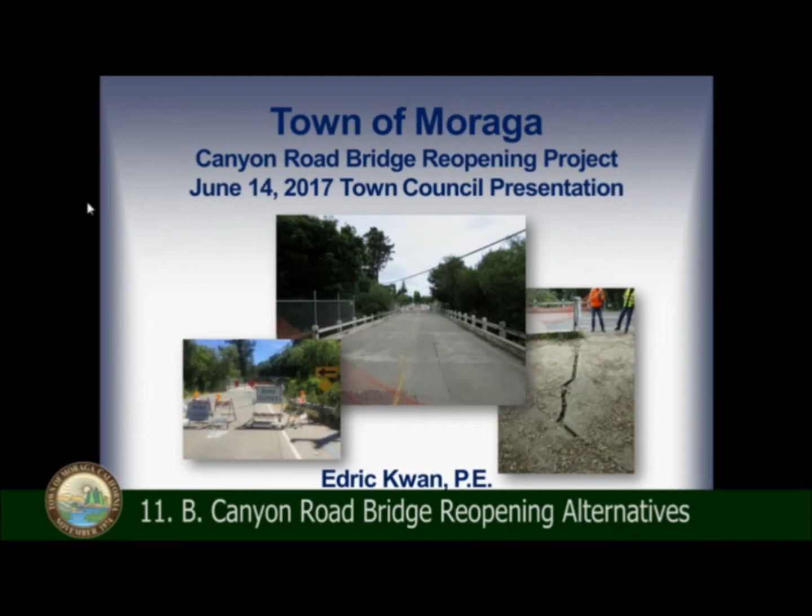We've assembled a team of experts to address reopening Canyon Road Bridge in the most expeditious manner as directed by you at the April 27th Town Council meeting. I want to first begin by stating that the health and safety of Moragans and members of the public who utilize our streets, roads, and public facilities is of the utmost priority to the town. The town has been diligently pursuing all available repair and funding options for this project, which is not only a health and safety concern, but inconvenient for town residents and businesses. Due to the nature and magnitude of this issue, coupled with the town's limited resources, the town is reliant on several federal funding sources and processes in order to address this project.

This is not my first time, but my third local emergency affecting a major local roadway. The first two emergencies involved securing substantial federal emergency funds, and I intend on continuing my efforts pursuing outside funding through its complex process for this emergency.

Our presentation will walk you through in detail the complexity of this situation by providing background and work completed to date, alternatives for reopening the bridge, staff's recommendation based on outside funding eligibility, timeliness, and risk, and next steps necessary to move forward with reopening the bridge. Please hold your questions until the end of the presentation, since we may be answering those questions as the presentation progresses along.

In this presentation, I'll begin by providing background to the Canyon Road Bridge. Kevin Tillis, President and Senior Principal Engineer for Hultgren Tillis Engineers with more than 34 years of experience, will then discuss the landslide and existing bridge conditions. Next, Lance Shree, Senior Project Manager for Quincy Engineering with more than 28 years of bridge design experience, inclusive of 13 years with Caltrans, has designed over 100 bridges in his career, and he will outline the various alternatives to consider. Our very own Shawn Knapp, Senior Civil Engineer for the town with over 17 years of experience in municipal engineering and quite well versed in the federal funding processes, will next provide details on the upcoming milestones in order to execute staff's recommendation to reopen the bridge.

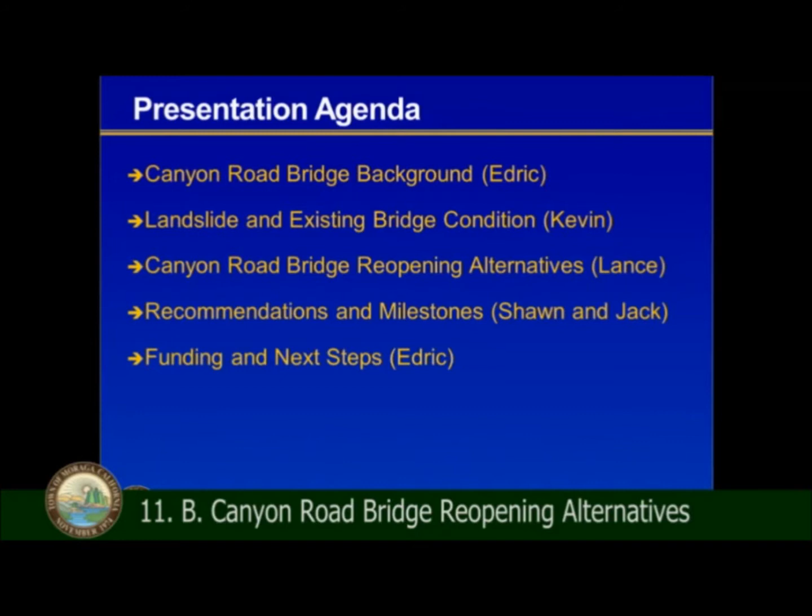Jack Walker, the Director of Transportation for NV5 - the same firm already contracted with the town to design the permanent repair and replacement of the bridge - will also join in and discuss the environmental, utility relocation, and right-of-way aspects. I will end with the funding requests and next steps.

Here you see a vicinity map and affected communities. The Canyon Road Bridge is located near the southern border of the town along Canyon Road. The two-lane bridge crosses over the west branch of the San Leandro Creek, also known as Moraga Creek. The concrete deck bridge was built in 1936, is more than 80 years old. The bridge deck is supported by a metal beam girder substructure on top of 4 rows of metal H-piling piers.

In the creek and along the creek banks, the existing bridge is relatively narrow and does not have typical modern-day safety features like pedestrian sidewalk or bicycle lanes. Canyon Road ends at a Y intersection with the south and north segments of Pinehurst Road, which leads to Castro Valley and the Oakland Hills, respectively. The community of Canyon, comprised of approximately 200 people and a small K through 8th grade school serving 69 students, is located along northern Pinehurst Road within unincorporated Contra Costa County.

The bridge was used by emergency responders, regional commuters, people accessing recreational parks and trails, local school children, and Moraga and Canyon residents. Based on the latest Caltrans bridge inspection report, the average daily traffic count is 6,000 vehicles, along with significant numbers of bicyclists and pedestrians.

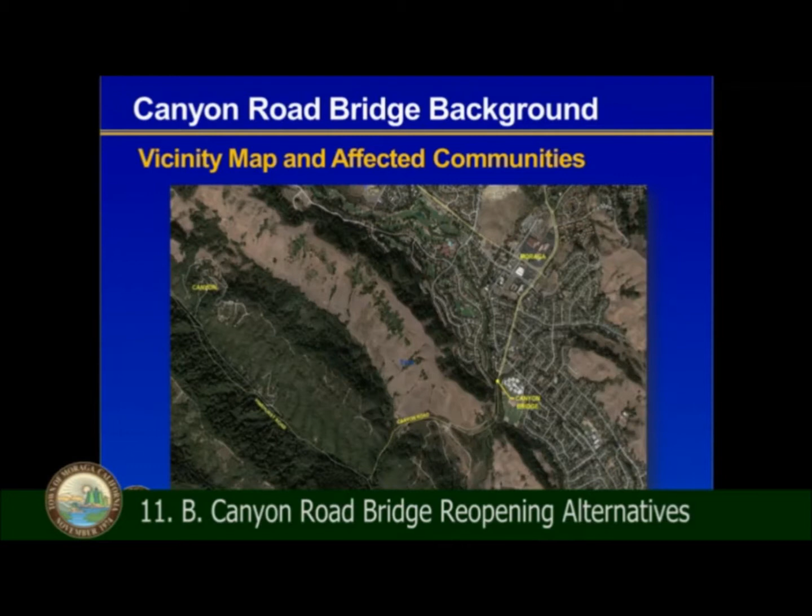Zooming into the nearby Canyon Road Bridge itself, you can see quite a few features here. You can see Moraga, AKA the San Leandro Creek, and Larch Creek that flows to the upper San Leandro Reservoir. You can see the Lafayette-Moraga Regional Trail that sits on East Bay MUD lands and possesses an easement by East Bay Regional Parks District. The trailhead itself connects directly to Canyon Road. It also serves as a fire trail, and it's also used quite frequently by students who walk to Joaquin Moraga Intermediate School.

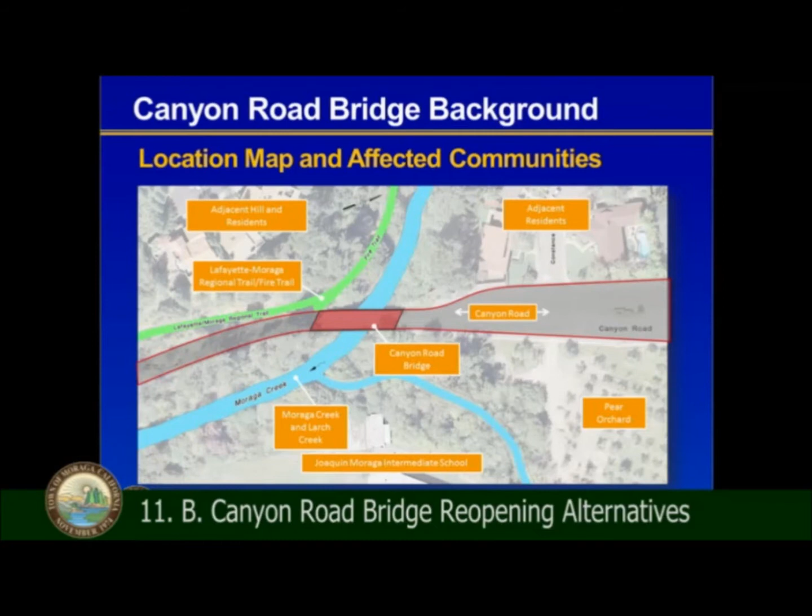Alignment of this existing road is very constrained by the creek alignment and hillsides, and adjacent residents you can see on the west side. Aside from having JM Intermediate School on the east side of the project, buffered by the pear orchard, it's also on school district land, and it's harvested annually at the end of September.

So I want to talk a little bit about what we've been planning for years. Back in 2014, the town secured a Highway Bridge Program grant and a Contra Costa Transportation Authority grant to replace Canyon Road Bridge. The bridge qualified for the HBP grant program because its sufficiency rating scored 48.8 on a scale of 1 to 100, and was considered structurally deficient and functionally obsolete, according to the 2013 Caltrans Bridge Inspection Report.

The project followed the typical lengthy federal funding process for its approvals, and the planned replacement of the Canyon Road Bridge was anticipated, prior to the recent bridge closure, to occur next year, mid-2018. However, in consideration of the current bridge closure situation and the unfortunate complexity of outside agency processes and timing issues, staff does anticipate delaying construction of the permanent bridge replacement until mid-2019.

Prior to the landslide, the Caltrans portion of the environmental process was nearly complete. The next phases for the permanent bridge replacement are right-of-way clearance, meaning obtaining all the right-of-way, easements, and relocating utilities; the engineering design, which involves preparing the plans, specifications, and estimates; and then finally construction.

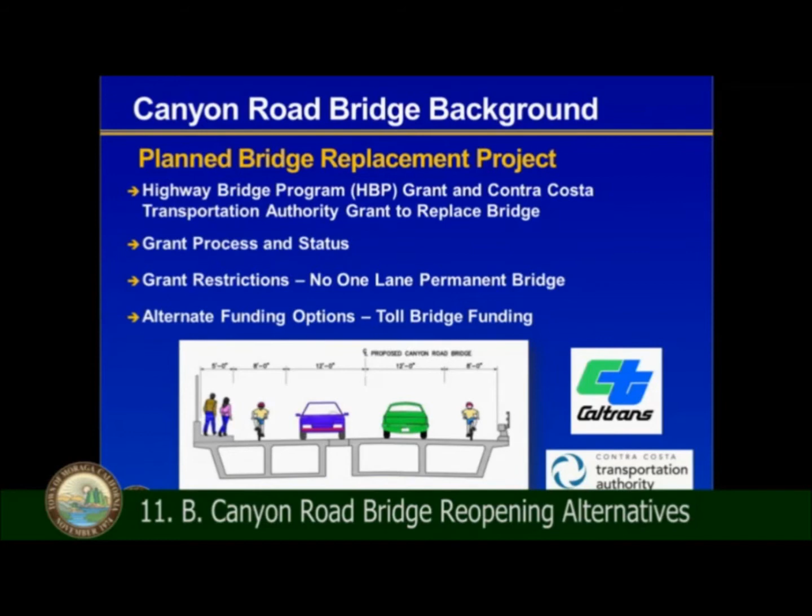The alternative approach to using secured HBP funds for the permanent bridge replacement of Canyon Road Bridge would be to enter into an agreement to privatize, meaning selling the existing bridge and right-of-way. Under this scenario, bridge tolls will be collected from local users to pay for bridge replacement and provide investor profits. Staff does not recommend changing the currently approved, fully funded federal project to a privately financed toll bridge project, which would be a significant change. If the town wants to consider this option, our attorneys would need to explore the legal and environmental ramifications. And not only that, this option does not accomplish getting the bridge reopened quickly.

At this point, I'm going to pass it on to our next section on landslide and existing bridge condition. Thank you, Kevin. See if I can master the clicker.

Good evening, I'm Kevin Tillis. I'm with Hultgren-Tillis Engineers. My portion of the presentation tonight, I'm going to start with a timeline of events.

You saw some of this before, and then I'm going to follow up with some pictures and show the site conditions. And then I'm going to show a little bit about the landslide, the depth of the landslide, the movement of the landslide. Basically kind of a factual summary of what's going on out there. So let's start out with the timeline of events.

On Monday, April 17th, your town was notified that there was some damage at the bridge location. They did a couple things. First, they contacted Caltrans to see if they would come out and do an inspection. Caltrans said no, we're not going to come out on an emergency basis, you need to do it on your own. Then they contacted consultants, which is myself and our firm.

On Monday they contacted us, and on Tuesday we came out to the site and took a look at the bridge. They also contacted engineers from NV5. Jack Walker's here with NV5, he's going to be talking later, but he wasn't the one that showed up to take a look at the bridge. There was tension cracks, an indication of mass landslide movement. We'll show the pictures here in a minute.

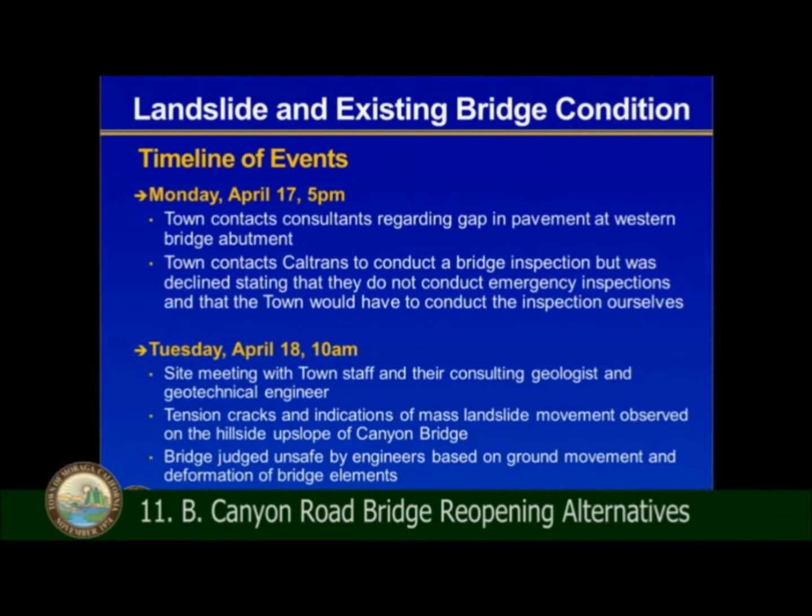Okay, the next day we started drilling borings. We put in 2 inclinometers on the next day, and later we put in 2 more inclinometers. And then we started to monitor the slides.

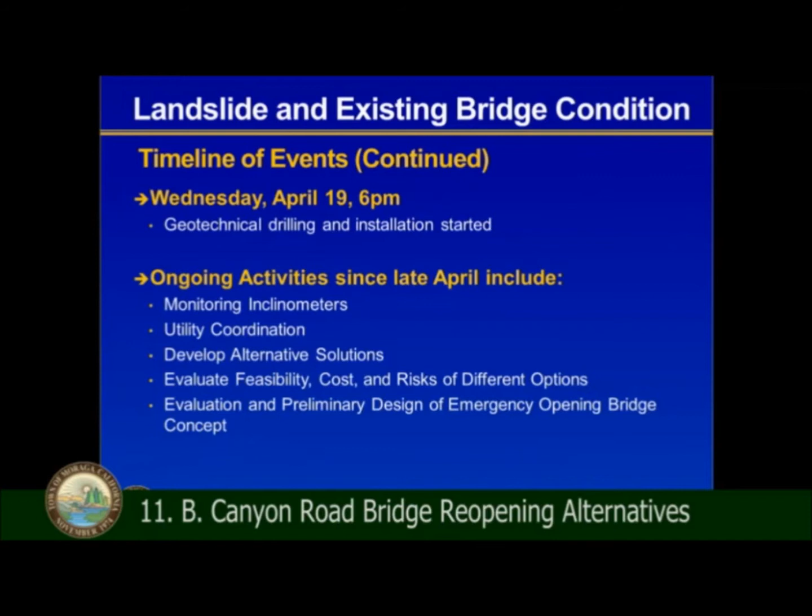And so since late April, things that have been done by the consultant team and your staff: we're monitoring the inclinometers. There's been coordination with the utilities that are going to be impacted, which will be discussed later. They've been developing alternative solutions; feasibilities have been evaluated, costs and risks of different options. And last, evaluations and preliminary design of emergency opening and bridge concept. All that will be covered in this presentation, but not by me.

So I want to do a little setting here, and I'm thinking my laser's probably not going to work, but I'm going to see if I can get the laser to work. No. Is that going to work? Yeah, it works better. You really can't see it, so I'll just talk to it.

Oh, there we go. Laser works on this, it doesn't work on that. I'm helping you. Right. He's doing the work for me, which is good.

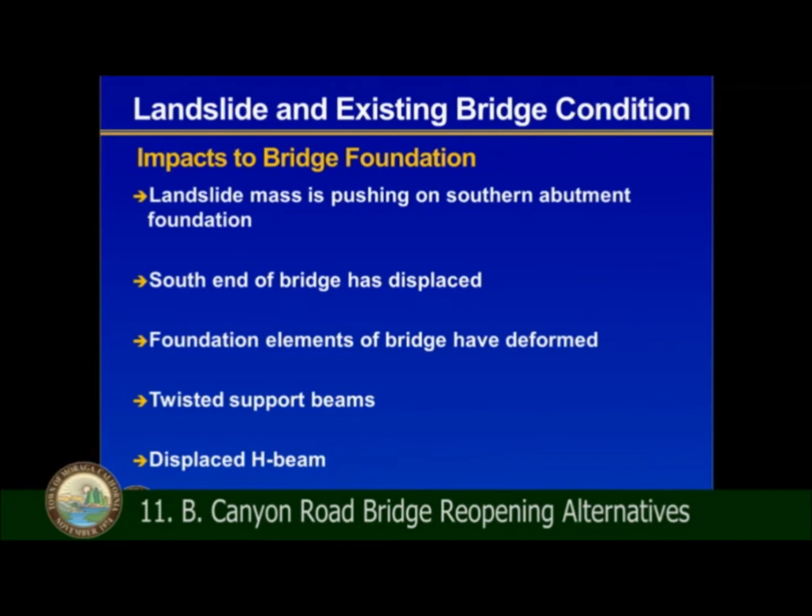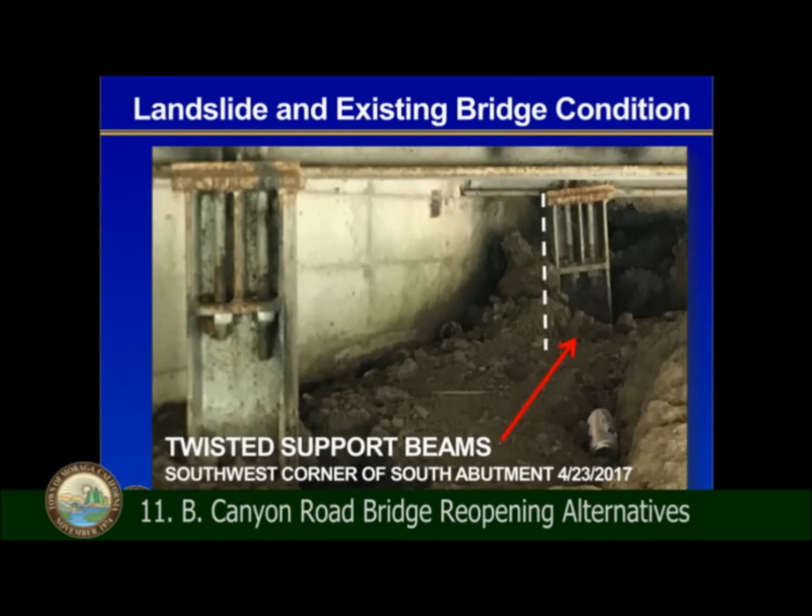The little white dashed line there, that would be vertical. And so you can see that that pile was vertical. NV5 has a picture of it in the past. That's how much it moved since the landslide, and it's also twisted the foundation. This is just a close-up picture of the same thing. I got a series of pictures here that are going to show the first bent. This is from the side of the bridge. This shows that the foundation's been racked, which basically means it's twisted. It's kind of turned.

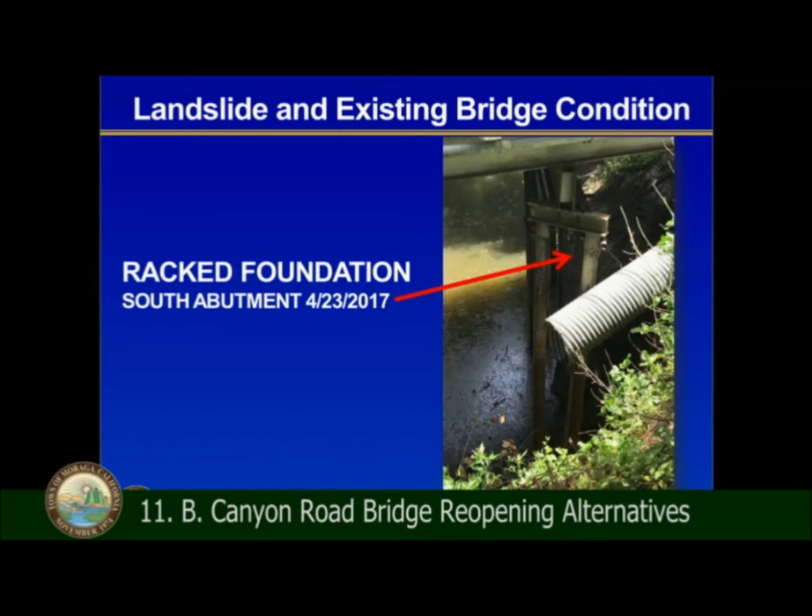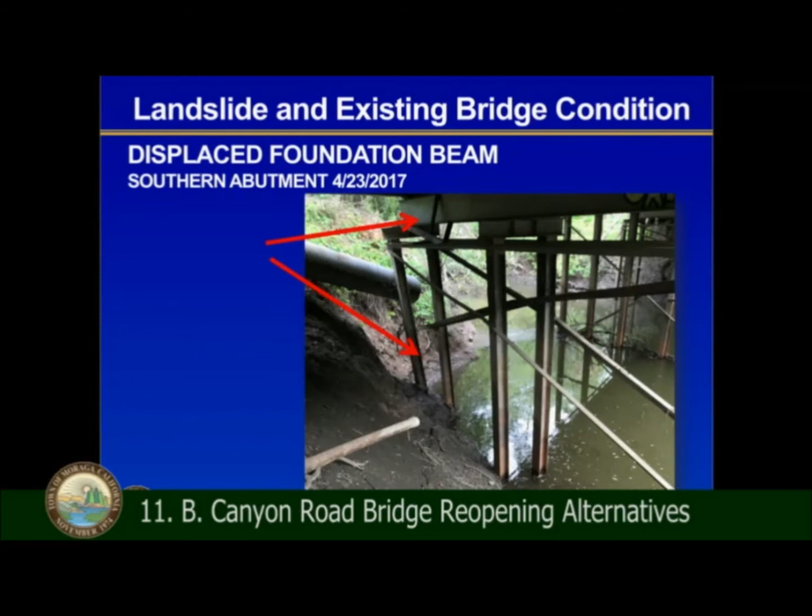Here's a similar picture. You can see from the arrows, it's pretty evident that the piling is moved laterally. It's not vertical. One of the things you want to notice is that the water's still up high. It was much higher than this during the winter. It had come down, and it's much lower now. Again, just a similar picture showing the bridge.

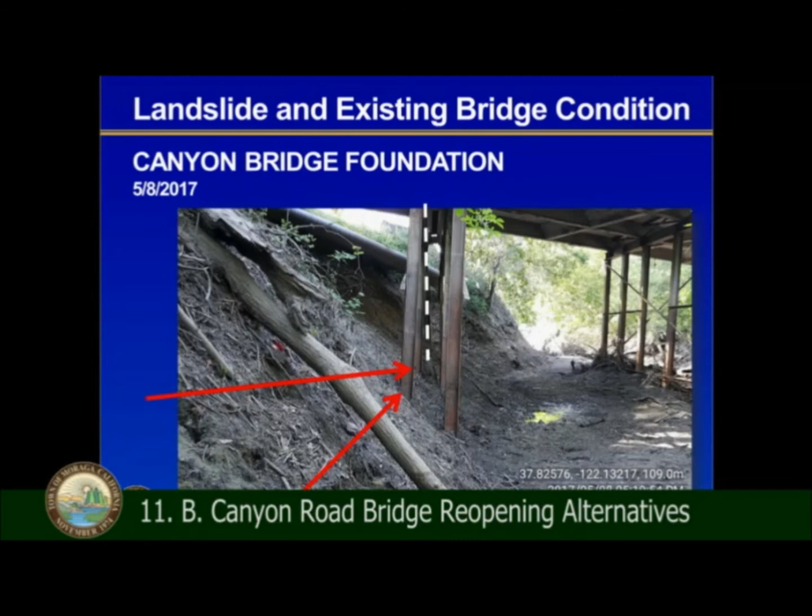This is coming from an angle there. The little white dashed line is actually the piles behind it. So you can see how both that one and the one closer to us have displaced downhill. And they've kicked out, it looks like about 12 inches, which is a significant amount of movement. This is just another picture later in the year. You can see that the water level is down now, and we're into sort of a normal creek situation.

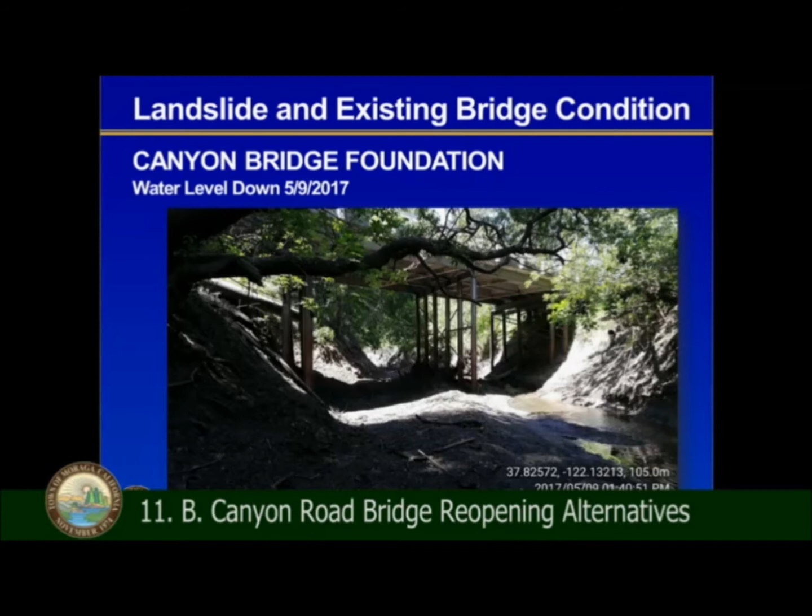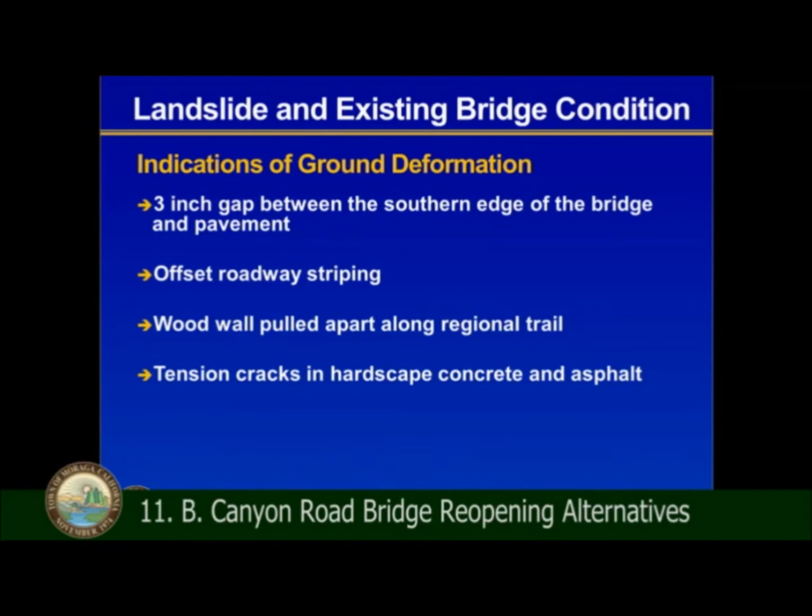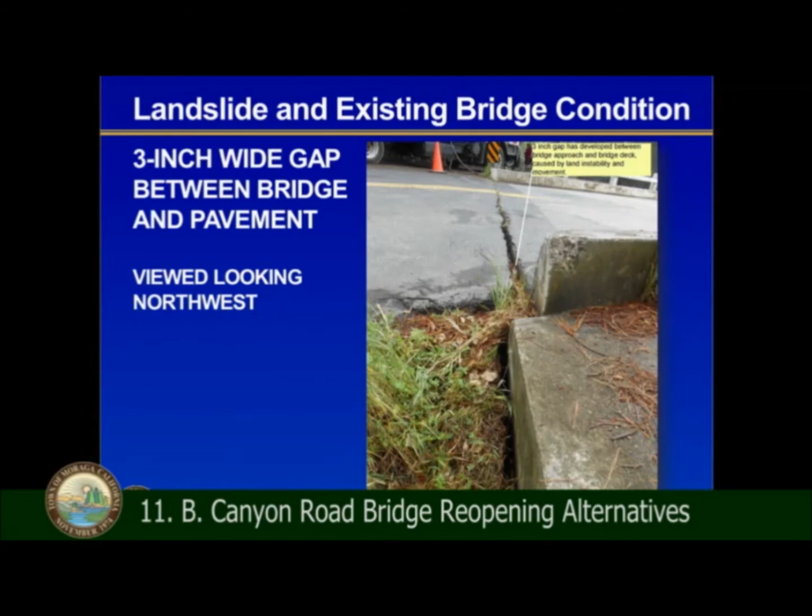So I'm going to show you some other deformation that occurred around the bridge. There's a gap in the southern edge of the bridge, offset striping, the wood walls pulled apart, and we've had some tension cracks. This shows the gap in the bridge. This has since been filled in by your staff. It's on the south end.

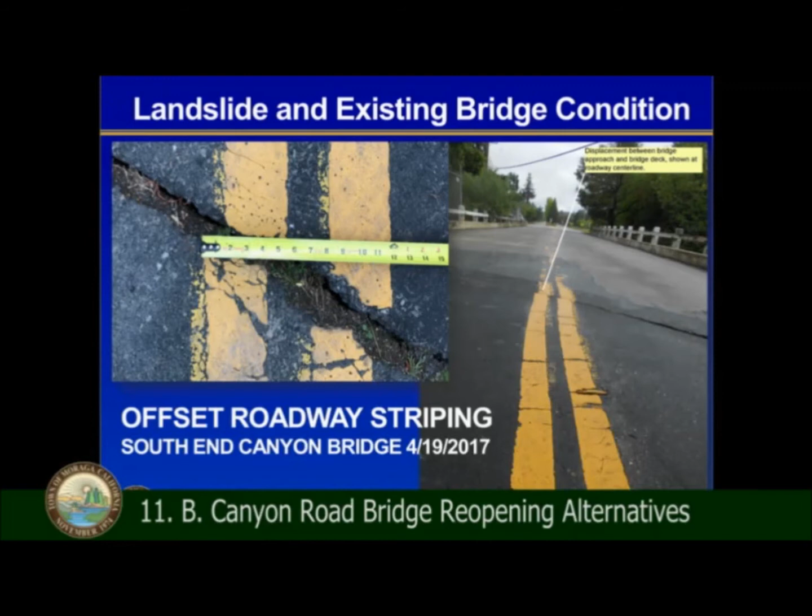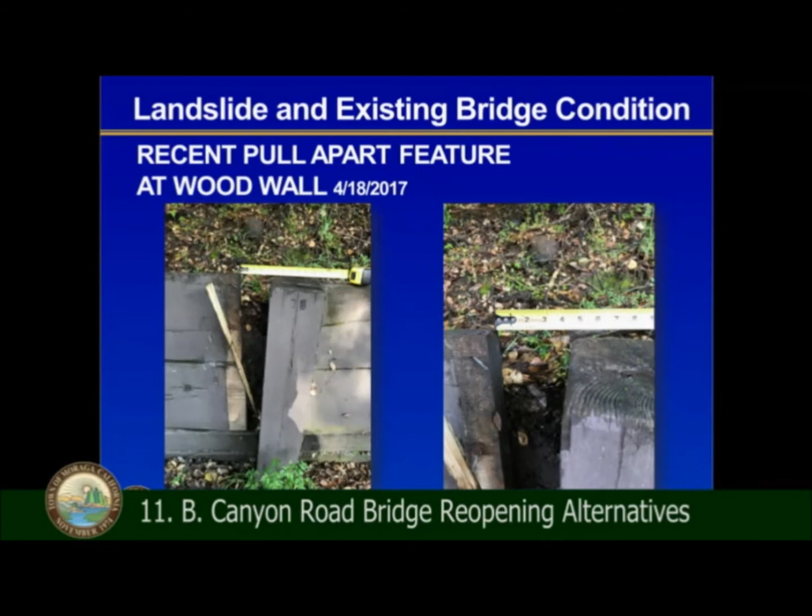And then I'm going to show you some pictures up towards the residences. Something we call a graben formed up there. There's tension cracks on the slope, and there's evidence of vertical and horizontal displacement.

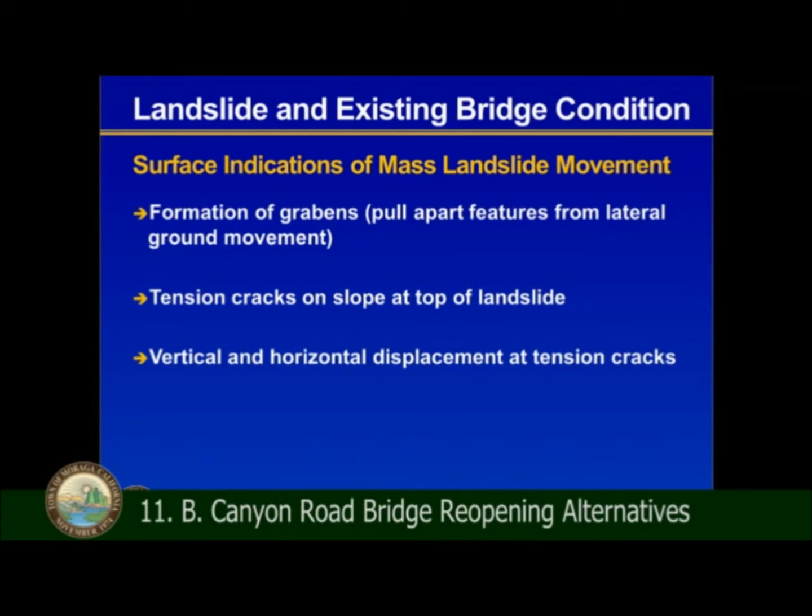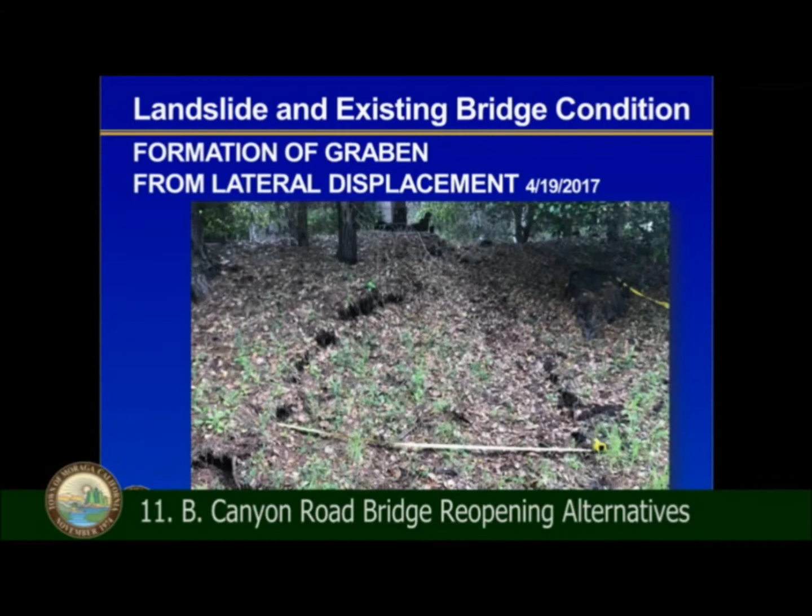So when a landslide moves laterally, the ground gives, and usually the top of it drops down. And so that's the graben. You'll see the two parallel cracks there. And so that's a piece that's just basically dropped in as the ground's moved away. That's pretty significant movement. And this is a crack that's heading down the hill towards the bridge. And then this is just something for perspective on the size of the crack.

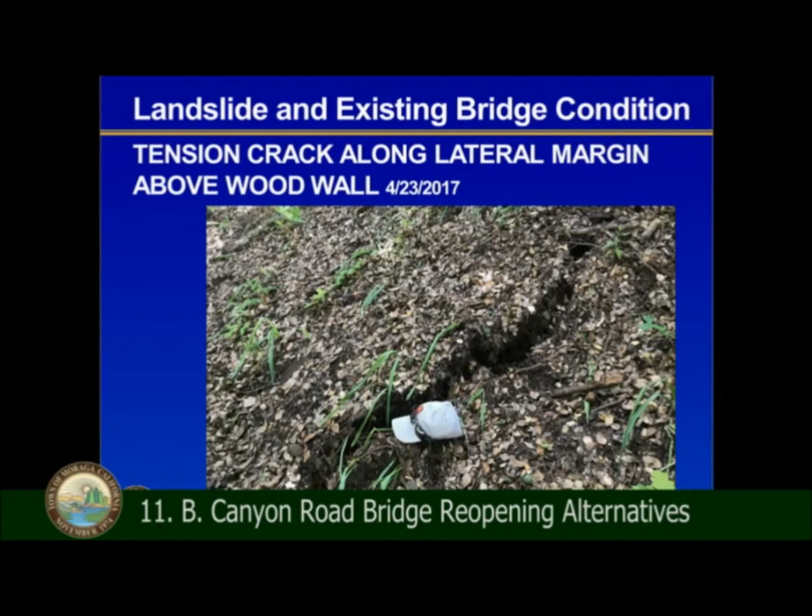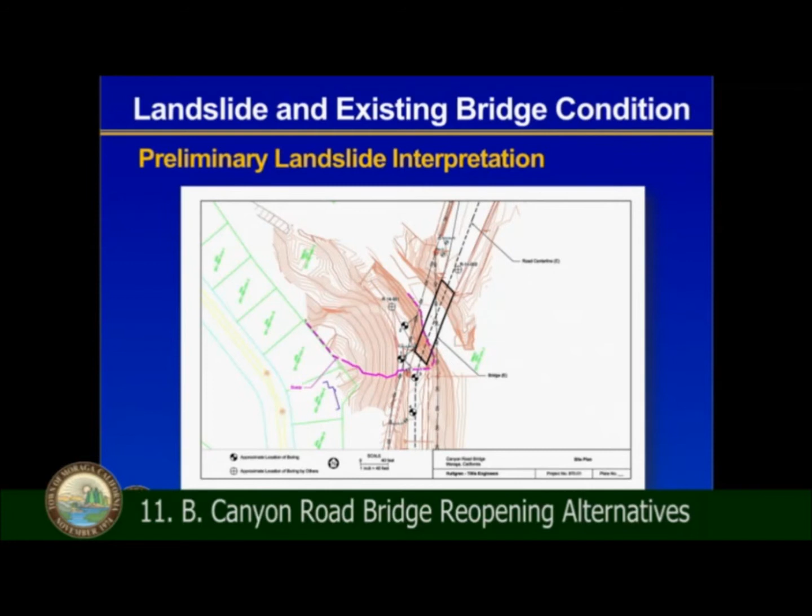So now I'm going to reorient you. I want you to see where 1 and 2 are. Edric, can you kind of point at 1 and 2 there? So we're going to show you the inclinometer there. There's little arrows that are going from there off of 1 and 2. That's the direction of movement from the inclinometers. So that's the direction the slide is moving.

And then the next slide here is the actual inclinometer plots themselves. So it moved 3/4 to an inch over about 2 to 3 weeks. And then since, it's essentially stopped. So since May 4th, the inclinometers are not moving, or they're not moving significantly.

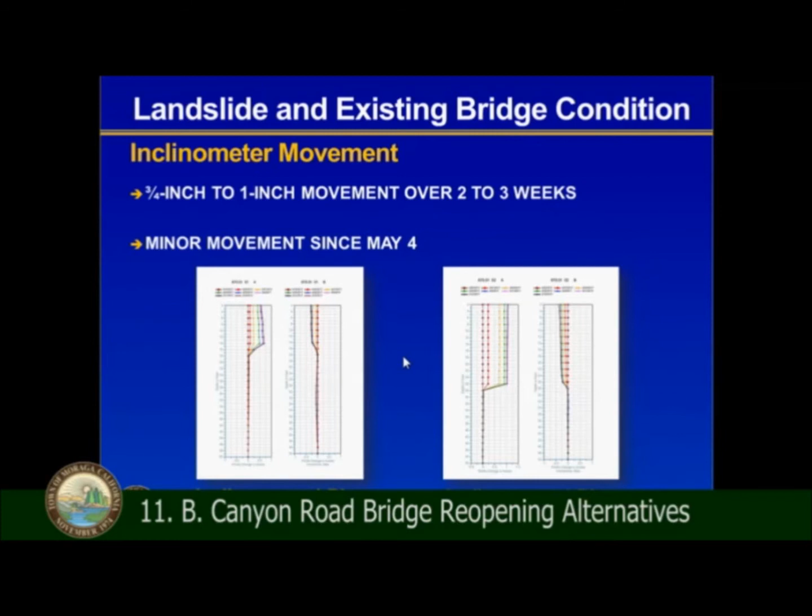So what do we know about the landslide? At the inclinometer locations, it's 17 to 26 feet deep. That's relatively deep for a landslide. And that's pushing on the bridge, so it's 26 feet deep right at the toe of the bridge there. Again, it extends up to the residential properties, and the toe of it is into the creek.

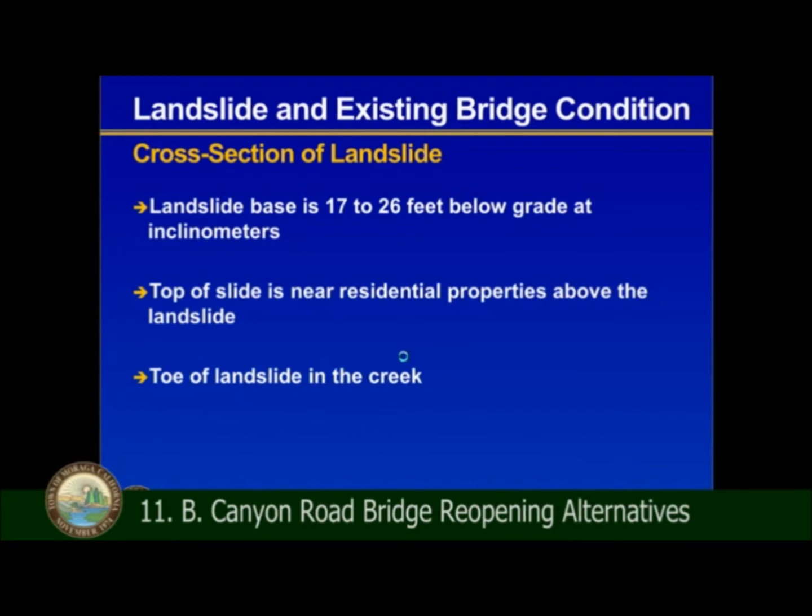So this is, actually, did I miss a slide? I did. No, I didn't.

Right. Okay. And this is a schematic of the landslide from one of our stability programs. So it shows the approximate shape we think of the landslide. So we know how deep it is at inclinometer 2. We know where the top cracks are, and we know that it goes into the creek, and so we drew a surface in there. Shows the water table about where we think it is, or was at the time the slide developed. We do have some information how deep the water is. The water level in the creek is down here in this analysis.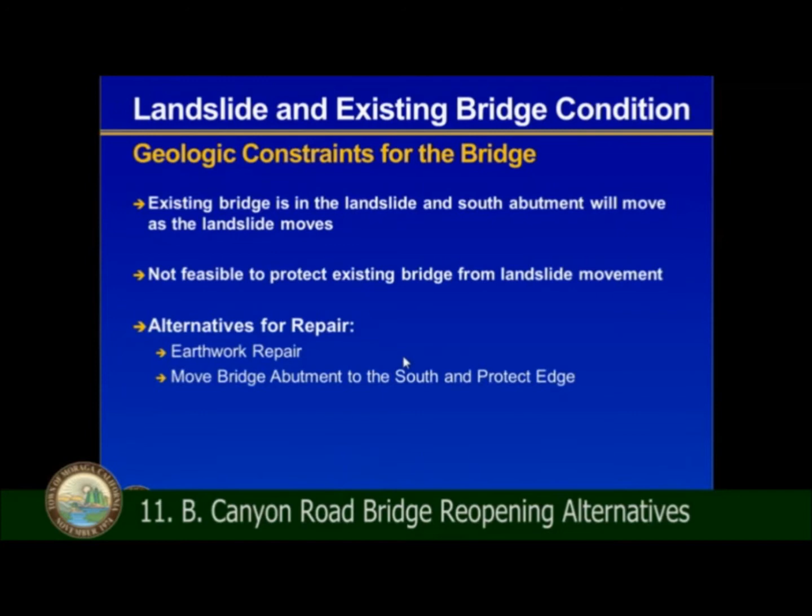So some of the alternatives for repair: you could do an earthwork repair, which Lance is gonna hit on, which is to dig the slide out, or we could move the bridge abutment away from and beyond the landslide and south of the slide, and then we'd protect the edge with some drilled piers, just in case the slide moves again, so we can force the slide around the bridge abutment. So with that, I'm going to turn it over to Lance. Lance?

Hi, Mayor, council members. My name is Lance Schrey. I work for Quincy Engineering. As Kevin pointed out, we did look at numerous alternatives. There were a couple alternatives that were dismissed early. The first of these is to build the permanent bridge now. Logically, it seems to make the most sense, take out the old bridge, put the new bridge in. However, there's emergency funds and HBP funds, and trying to mix the pots of money is difficult, and so Caltrans didn't allow that alternative.

The second alternative that we dismissed fairly early was trying to resist the landslide with a retaining wall. As Kevin pointed out, Kevin gave us the forces and the location of the forces, and we did some preliminary design, and we came up with 7-foot diameter shafts, spaced at 8 feet, 65 feet down in the ground. Really not constructible.

With that, also, we don't know the full extent of the damage of the existing bridge. So with that, these are the 6 alternatives that we did look at. All of the alternatives, other than the do-nothing alternative, are some combination of the earthwork repair, temporary bridge, or a protection wall. The factors that we looked at when we're considering each of these alternatives was how long is it going to take until we can get the bridge reopened, what's the cost, and what's the risk level.

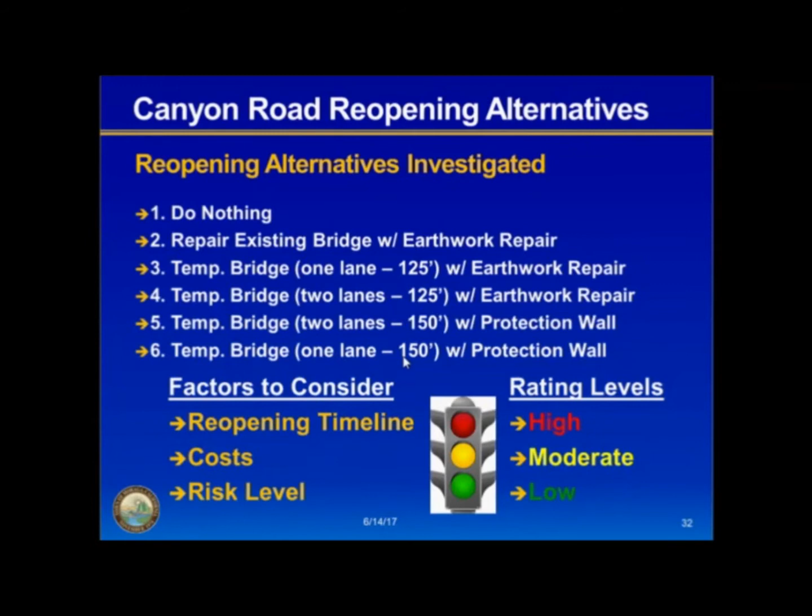You'll see there that we have a rating level. So in the following slides, text that's in green for these considerations are low, yellow is neutral, and the red ones are high. The first alternative that we investigated is the do-nothing alternative. This is an alternative where we wait till the permanent bridge is designed and built. We're looking at about 2.5 years. So we'd go 2.5 years without emergency services, without an evacuation route. So the risk level of this is very high. The cost is about $500,000, and you're really not getting much other than, those are the costs incurred to date.

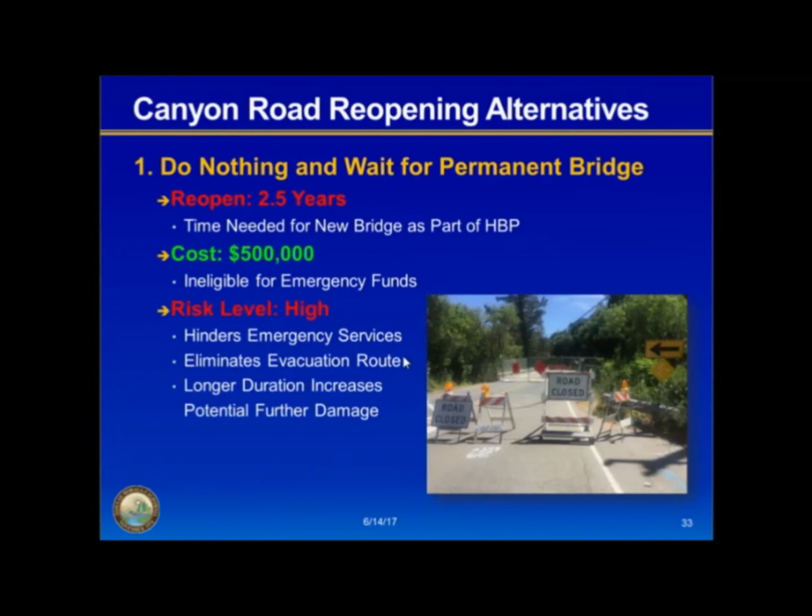The next alternative is an earthwork repair combined with repairing the existing bridge. The earthwork repair would consist of taking out all the landslide material down below the slip plane, putting material back, compacting it, and it's probably going to require a retaining wall to help facilitate the construction of that. That is going to cost approximately $3 million. And then the extent of the bridge repair is kind of unknown. And so with that, we put a range in there from anywhere from $100,000 to $1 million. So this alternative costs anywhere from $3 to $4 million. This is eligible for emergency funds.

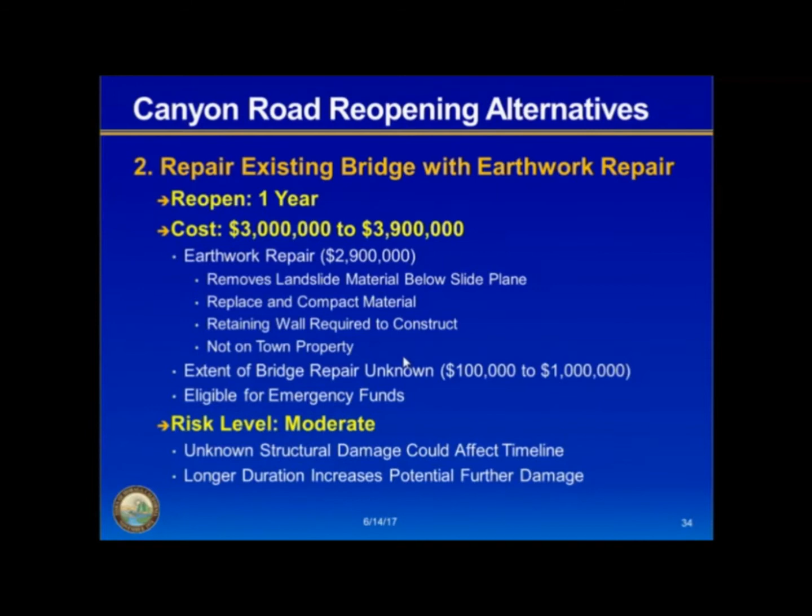I was going to elaborate, but I don't think it's needed.

The next alternative is, again, we're going to use the earthwork repair. So the same thing that we used on the previous one, but instead of repairing the existing bridge, we're going to put a one-lane temporary bridge in. The temporary bridge would be approximately 125 feet long, and it'd be only one lane. This would be eligible for emergency funds, and it would be a duration of about a year. The cost for this one is expensive at $4.6 million.

The fourth alternative is very similar to the previous alternative, where we're still using the earthwork or the earth removal and replacement. However, now we're putting a two-lane temporary bridge in. Once again, it'd be 125 feet. However, this is also the most expensive alternative. It's a little bit longer than the previous alternative at 1.5 years. However, this is not eligible for emergency funds because the emergency funds pay for the bare minimum, which in essence is just a one-lane bridge.

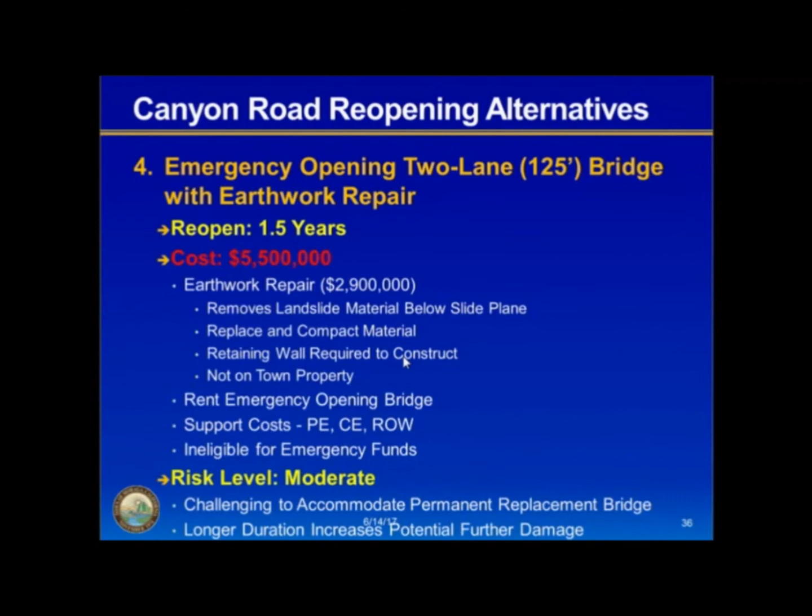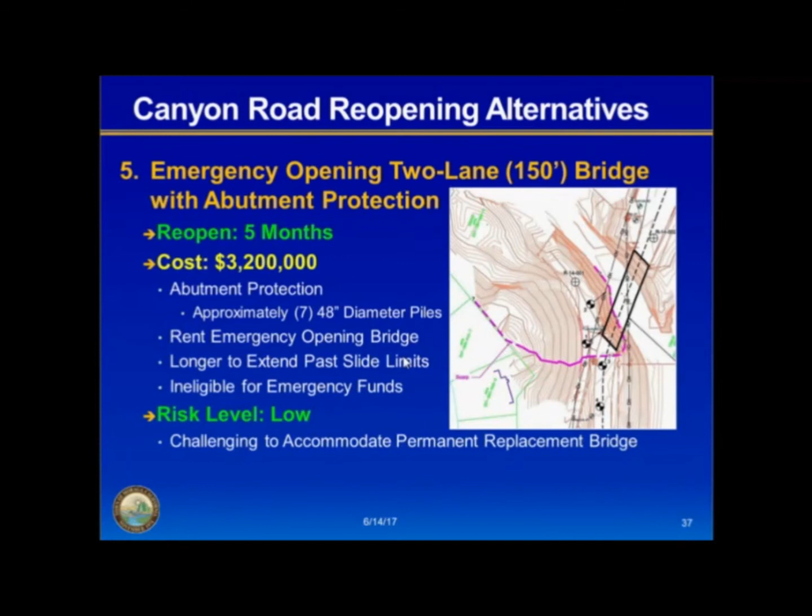The next alternative is we're getting away from removing the dirt now. Now we're looking at putting a temporary bridge in and a protection wall. As you can see, the purple line that Kevin talked about shows the limits there of the landslide. So now we're gonna take the temporary bridge and lengthen it, and we're gonna have that southern abutment land on the other side of the limits of that landslide. And in doing that, the bridge length gets to about 150 feet. We're also gonna put a protection wall, just in case the landslide moves a little bit, to protect that abutment. This is gonna cost $3.2 million, and the time factor on this is 5 months, so much better, so the risk level is much lower. However, it's a two-lane bridge again, so this wouldn't be eligible for the emergency funds.

The last alternative we looked at is just like the previous alternative, but instead of the 2 lanes, now we're just looking at the 1 lane. This would be eligible for emergency funds. We're looking at reopening in about 4 months, and the cost is just barely over $2 million, and the risk level is very low. And with that, I'm gonna give it to Sean, and he can go through the recommendations.

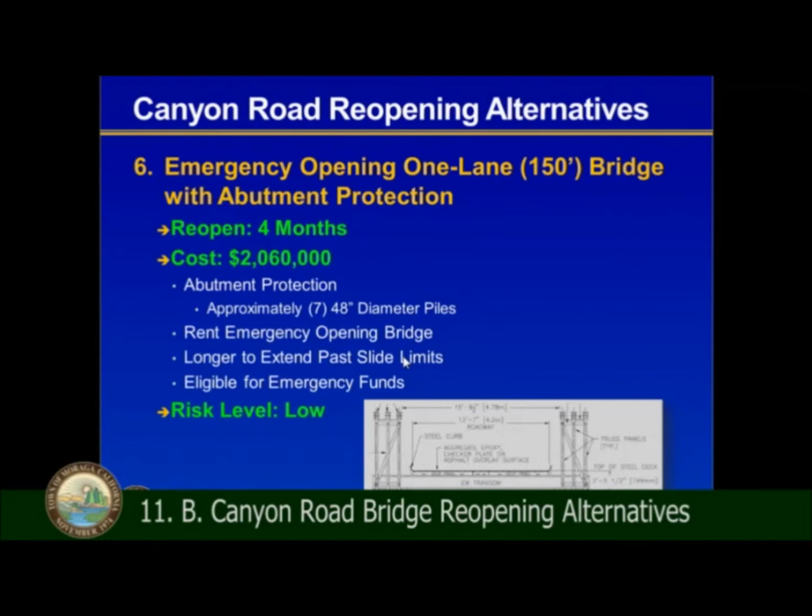I'm going to go through a table here quickly. Lance has gone into great detail about these options, and I'm just going to highlight them and get down to where the staff recommendation is. Again, the first option that we considered was the do-nothing option, which project cost would be $500,000, which includes costs to date in maintaining the site in a safe manner till we build a permanent bridge. Again, this is ineligible for emergency funding, the funding that we have spent so far, since we are not seeking emergency funding. Reimbursement would be incurred at the expense of the town. We consider this a risk of high because of that.

A second alternative we considered was repairing the existing bridge with the extensive earthwork option. This hillside repair would not be on town property, so we'd have to attain rights to access and repair it. The high cost is $3 to $3.9 million, and it would be eligible for emergency funding, with a duration of approximately 1 year. We consider this a moderate risk, and for those reasons, we don't recommend it.

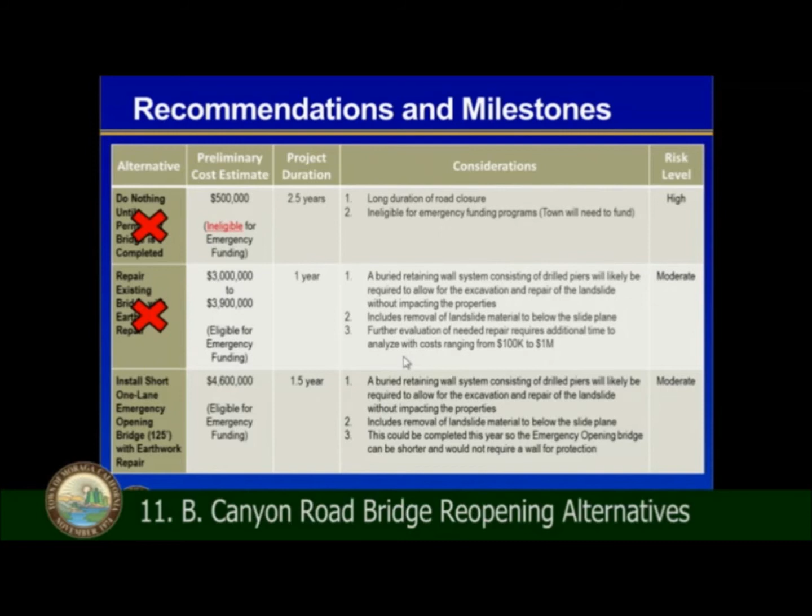The third option was the installation of a one-lane bridge, still using the earthwork repair. This is eligible for emergency funding at $4.6 million, with an approximate duration of 1.5 years to complete. We consider this a moderate risk level and still not a desired option for those reasons.

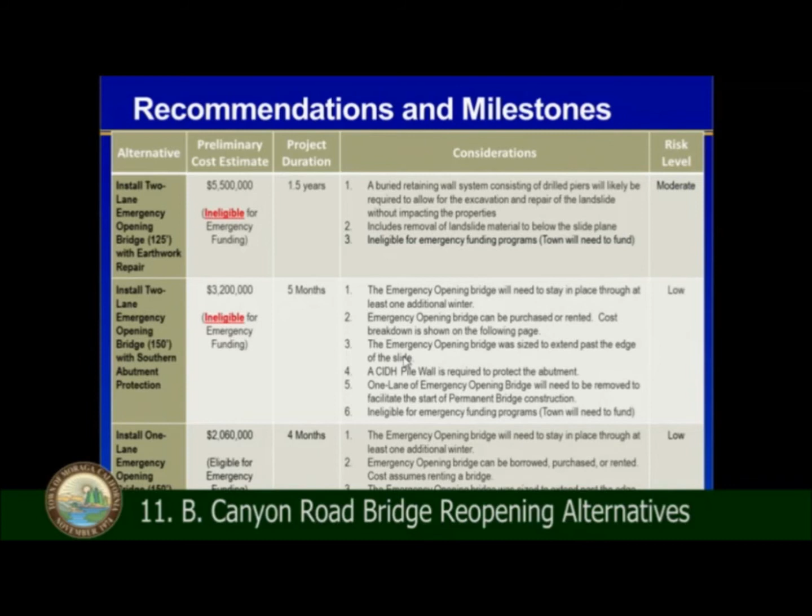The fourth option was to install the two-lane short bridge. Because of the additional non-essential capacity, it's ineligible for emergency funding. It would cost $5.5 million with a duration of 1.5 years to complete. We consider this a moderate risk and not a recommended alternative.

The fifth option is the installation of the two-lane long bridge with southern abutment protection, getting away from the complex hillside stabilization. It's also not eligible because of the two-lane configuration, and the cost would be $3.2 million, but with a much sooner turnaround of 5 months. We consider this risk level much lower because of the lower cost and faster turnaround, but again, not a recommended option because of the inability to get emergency funds for this.

Finally, alternative number 6, which we do recommend, is the one-lane configuration, long span bridge over the slide area with southern abutment protection, at a price of $2.06 million with an estimated time to completion of 4 months, barring any difficulties or delays relative to environmental permitting and utility relocations. We consider this a low risk and recommend it from a staff standpoint as the preferred alternative.

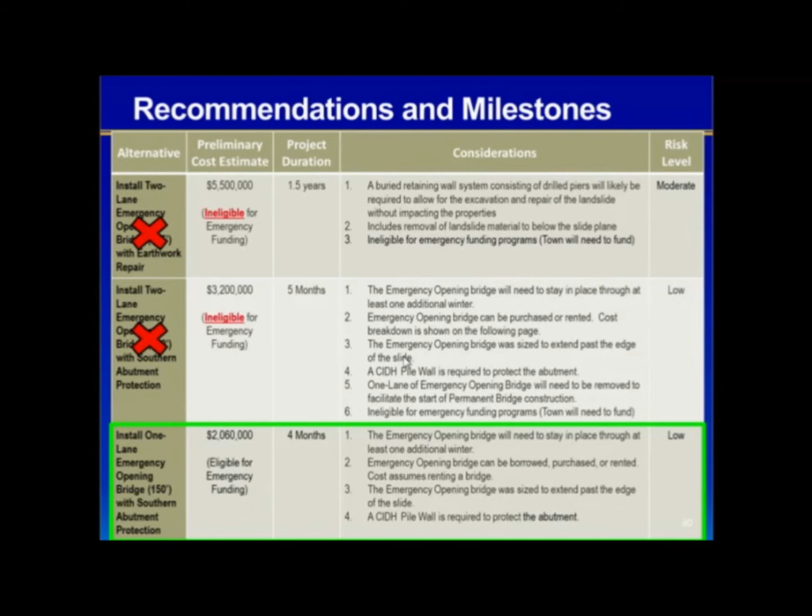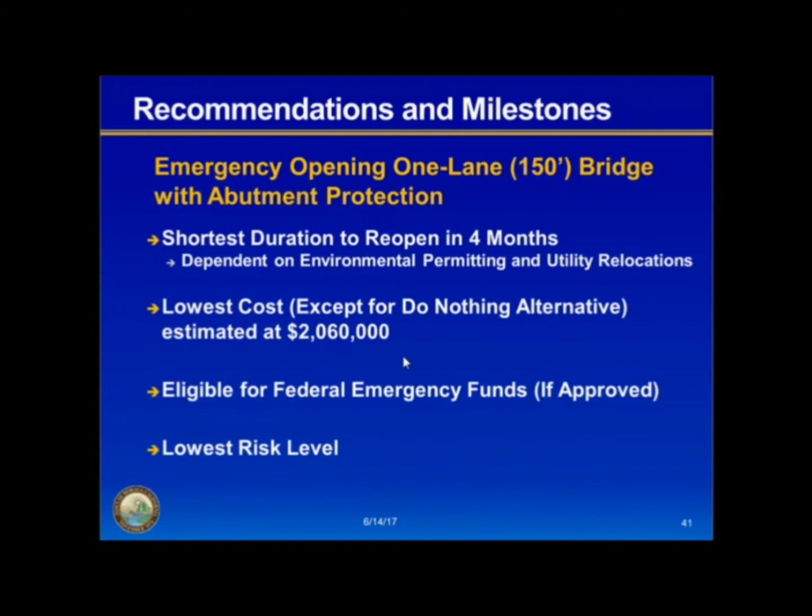I'll just repeat the highlights of this particular option. Again, it's the shortest duration to open the bridge, it's the lowest cost at $2.06 million, eligible for reimbursement from federal funds if approved, and it has the lowest risk level associated with it.

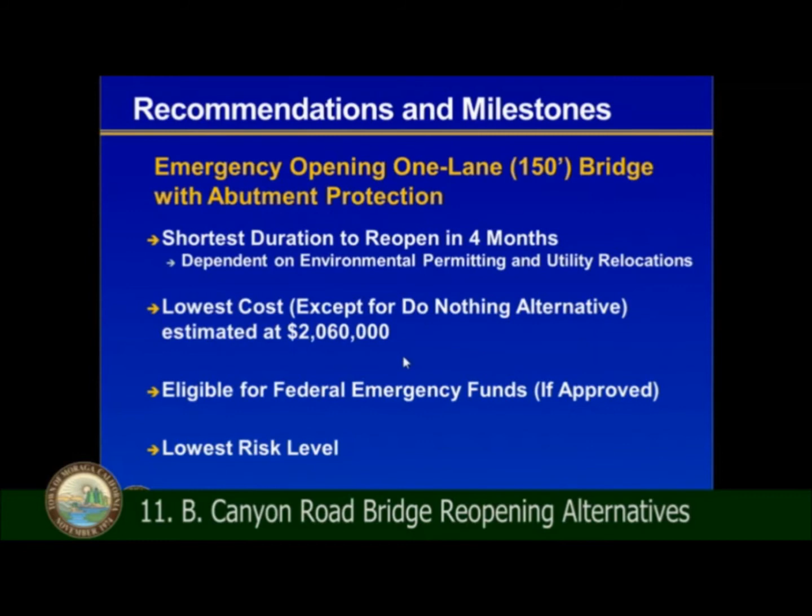At this point, I'd like to turn over the presentation to Jack Walker with NV5. He'll go into some of the details about the risk factors with any of these projects as we move forward. Good evening, I'm Jack Walker with NV5, and I'm going to be discussing the environmental studies, utility relocations, and right-of-way.

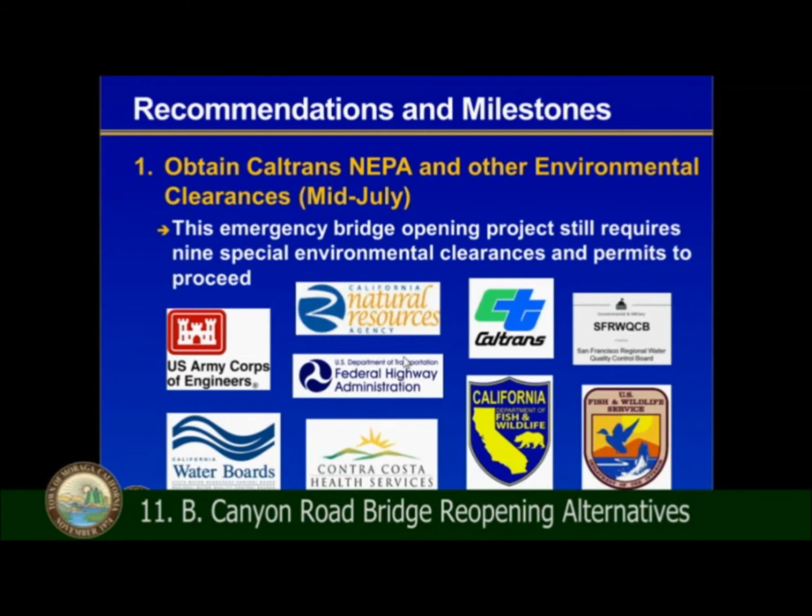Regarding environmental studies, this project will require environmental clearances and permits, including approvals from Caltrans and environmental resource agencies. This slide shows a list of the approvals and permits that'll be required to build this project. Currently, the environmental staff that worked on the studies for the permanent bridge project have started working on the requirements for clearance of this project option.

Regarding this being an emergency project, we'll basically be able to do emergency consultation with Army Corps to hopefully facilitate streamlining this process.

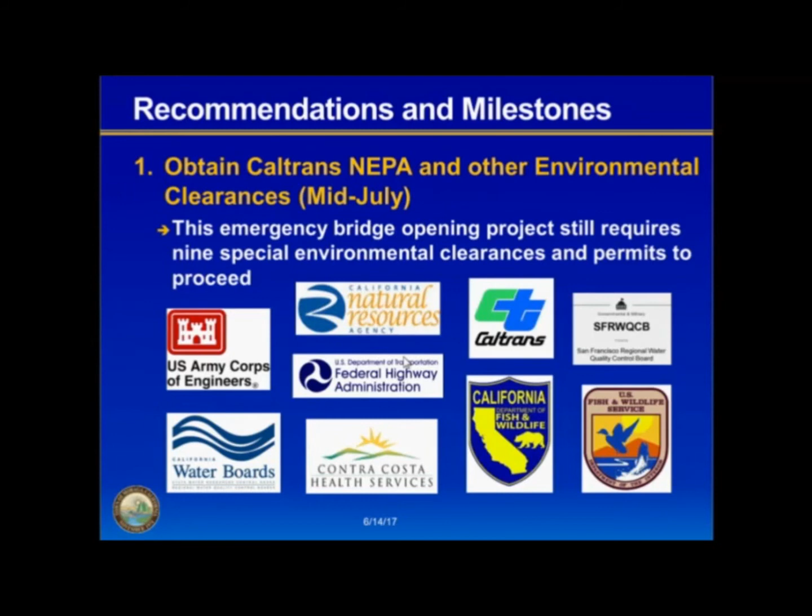Regarding utility relocations, there are 3 existing utilities at the project site: PG&E, AT&T, and Sprint. The Sprint fiber optics line is actually attached to the existing bridge currently, so it'll need to be relocated. The plan for the Sprint line is to relocate it, and it'll go underneath the creek with directional boring.

AT&T is an overhead line that goes over the current existing bridge and is in conflict. So the plan would be to relocate that to the PG&E poles that are along the west side of the existing bridge.

The PG&E line along the west side of the bridge - we've located the temporary bridge to avoid the relocation of the PG&E line. This avoids the time it would take to relocate and find and acquire easements for PG&E, so at this point we do not see that as being a relocation. We may need to de-energize that line at certain points during construction in order to construct the temporary bridge.

Regarding right-of-way, we've laid out the temporary bridge to minimize the right-of-way needs as much as possible. We all know that the right-of-way acquisition process can be a long duration, so at this point we only foresee a temporary construction easement being required from East Bay Mud.

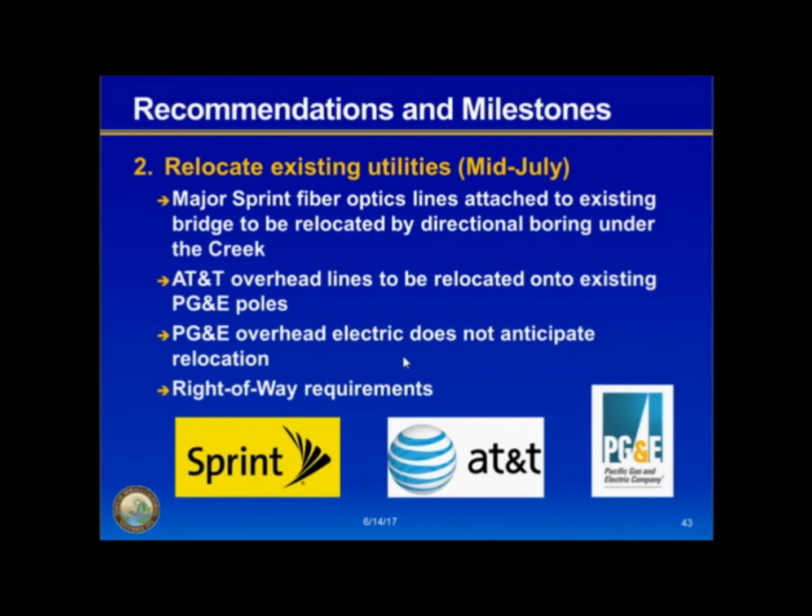Regarding environmental protection, if the existing bridge needs to be removed, there could be a need for creek diversions to allow the removal of the existing bridge. There could also be other environmental protection measures that will need to be put in place based on the requirements of the environmental permits.

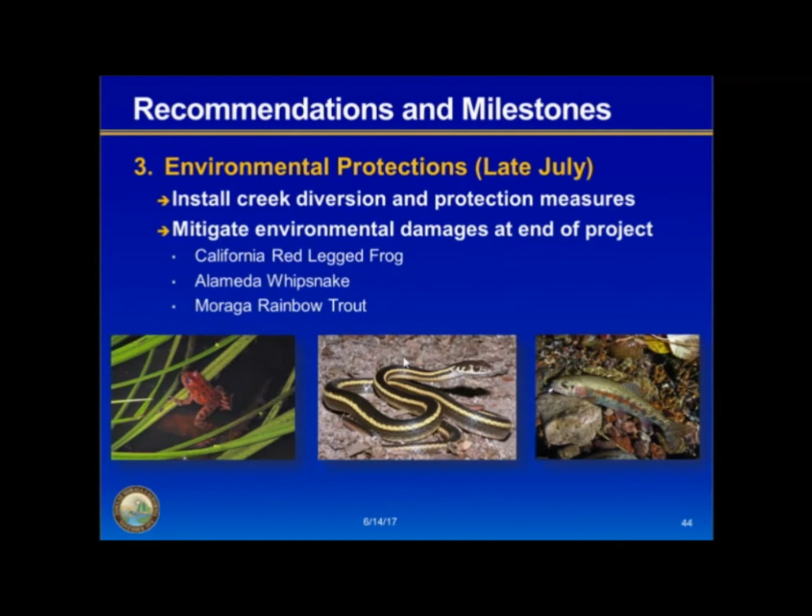For coordinating with all these utility companies and environmental agencies, there is of course risk that this could affect the project schedule, but we are doing everything we can at this time to coordinate and keep all the third parties involved in what's going on in order to lessen any risk to the project schedule. At this point, I thank you, and I'd like to pass it back to Sean.

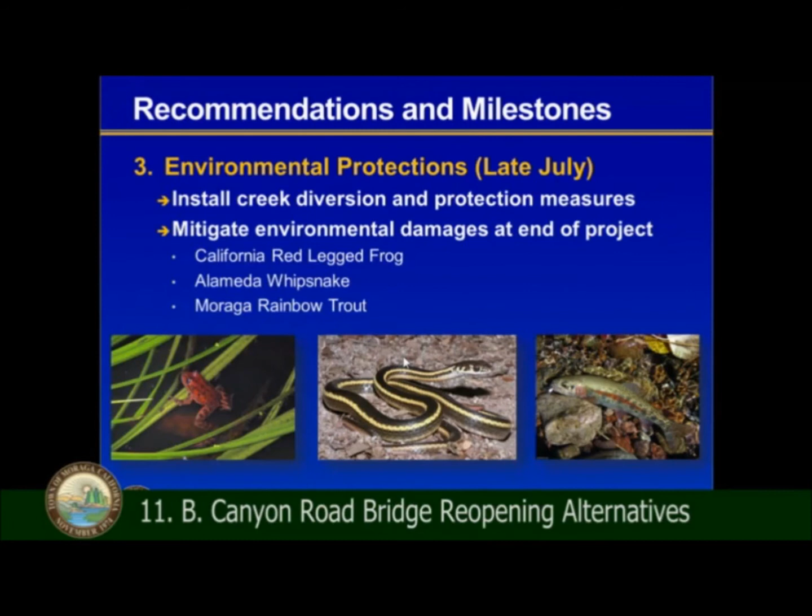Thank you, Jack. So I'm going to continue through the slides and illustrate the next steps of this particular alternative. The first step, after the relocation of the utilities, would be the demolition of the existing bridge, to occur sometime in mid-August. In your staff report package, this was initially anticipated to occur in late July based on information we received from Sprint and their fiber optics relocation process. We've moved back the demolition period to mid-August.

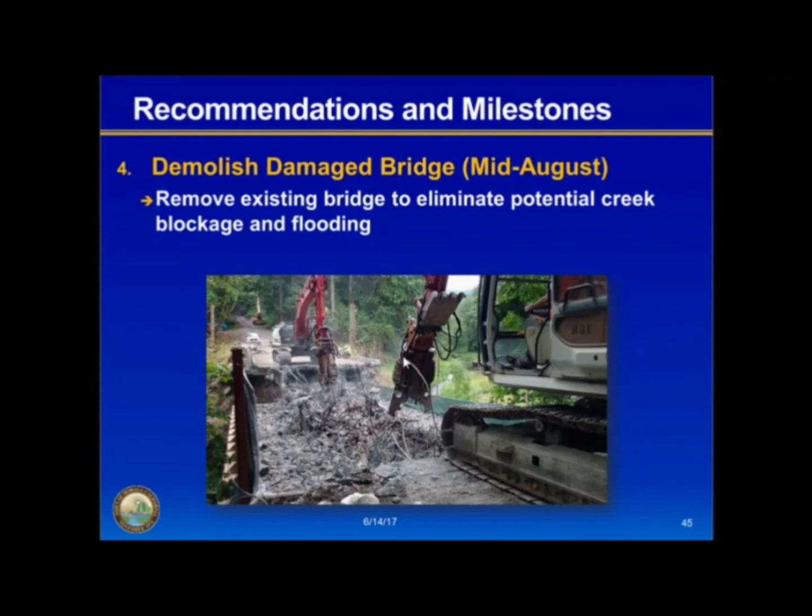The demolition of the bridge is not a critical path item, and as such, it will not drastically affect our schedule. So we don't anticipate any issues because of that.

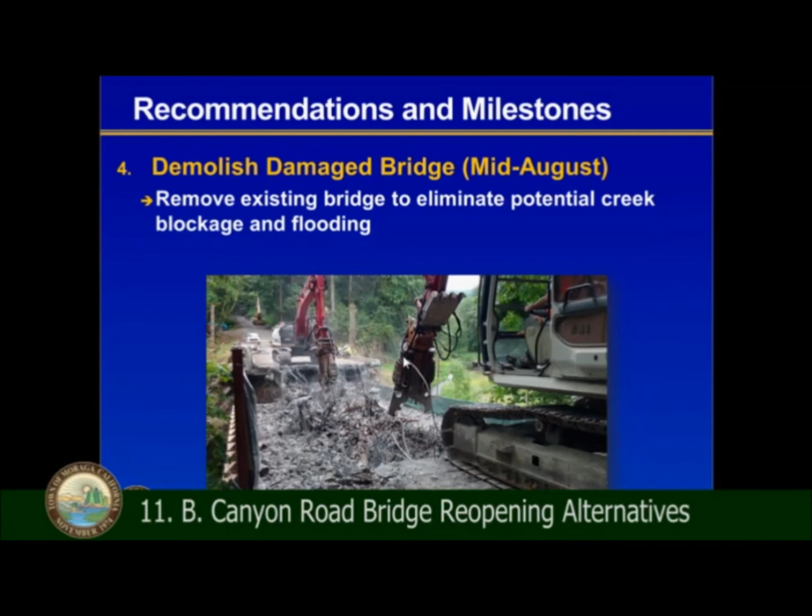We had talked earlier about the magnitude of trying to protect the bridge, and in doing so, we would be drilling 50 feet or deeper piers on the southern side of the bridge that protect the abutment for this bridge. You can see visually, they'd be large piers, 4 feet in diameter, drilled deep into the earth.

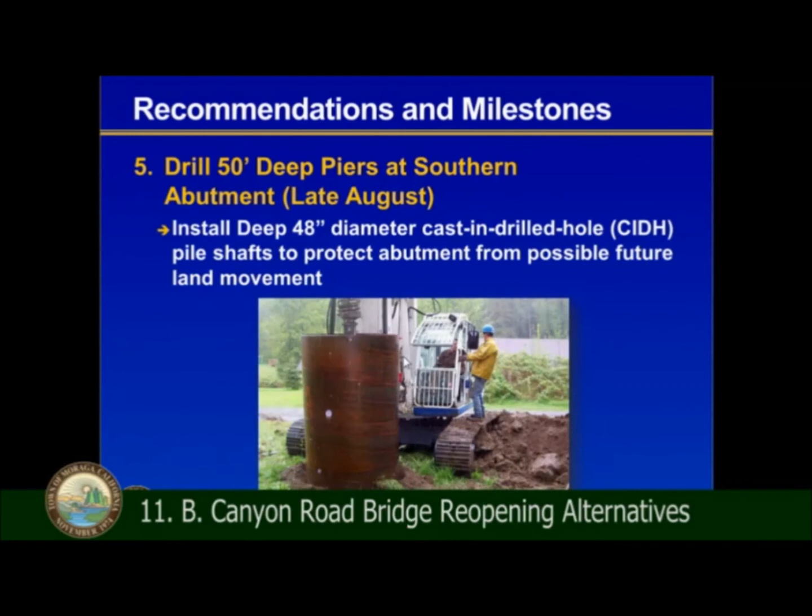On top of those piers would be a structurally enhanced abutment, a foundation abutment that would sit on top of those piers. And on top of that, the temporary bridge would be attached.

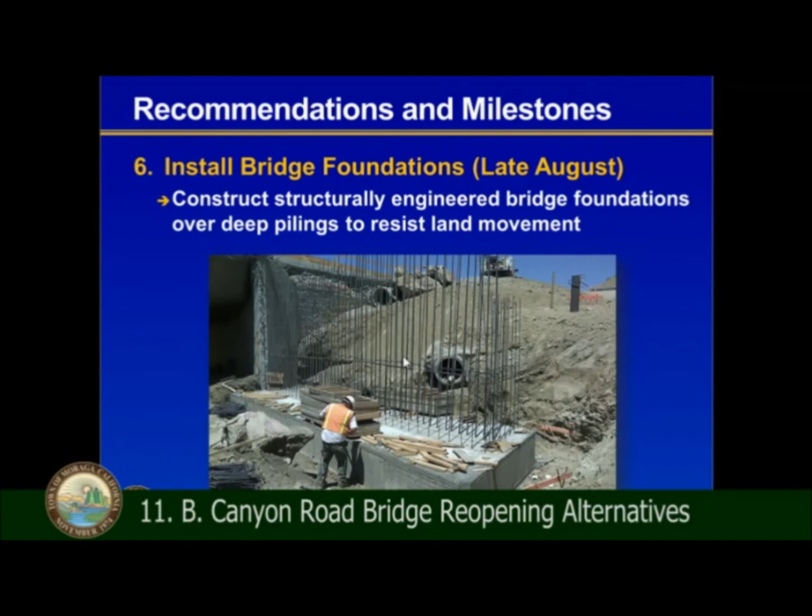The one-lane bridge, as proposed, would be constructed in mid-September. It would have a clear lane of approximately 14 feet wide for traffic, under a two-way monitoring system with a traffic light.

We would attach, as proposed, a 5-foot wide sidewalk to the side of this temporary bridge for pedestrian access, and try to reestablish access for pedestrians and others to utilize the regional trails nearby.

We looked at multiple options for bridge acquisition, including borrowing from other agencies, but we found no agency that had a bridge of this length and was willing to lend it to us, because that would leave them unprepared for a similar situation. So we eliminated that option.

We looked at purchasing a bridge, and based on your staff report, using a 2-year analysis and calculations from the one quote we received so far, the bridge cost would be $423,600. Talking to the emergency relief managers who would fund such a project, they told us they'd have to amortize the cost of the bridge over an expected 30-year period. So with that cost of bridge, we'd basically be reimbursed about $14,000 per year of usage.

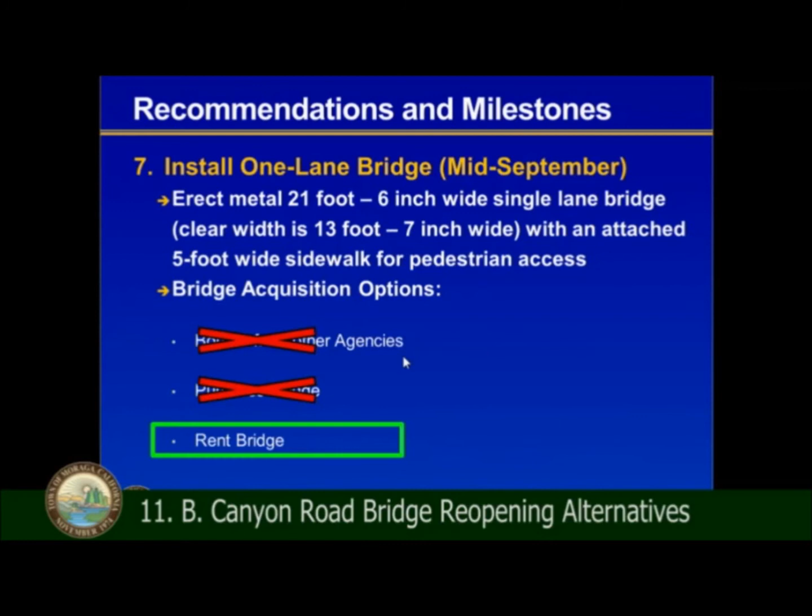So renting the bridge is the most economical option, and it's 100% reimbursable during the first 180 days after an incident. After that, the reimbursement ratio reduces to 88.53%. So we do recommend renting a bridge as the scenario to move forward.

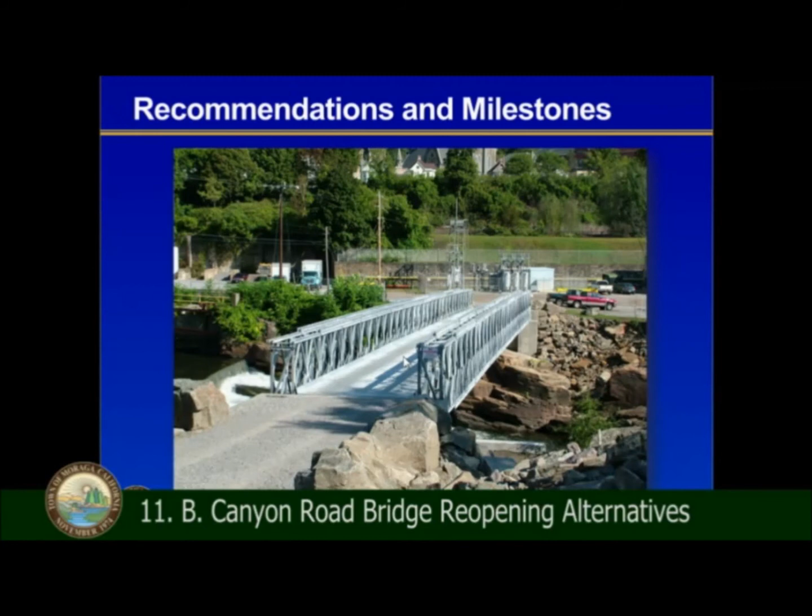Illustration-wise, I'd like to show you a few pictures of what a temporary bridge would look like when installed. Here's another example with a 5-foot sidewalk walkway along the edge of the bridge.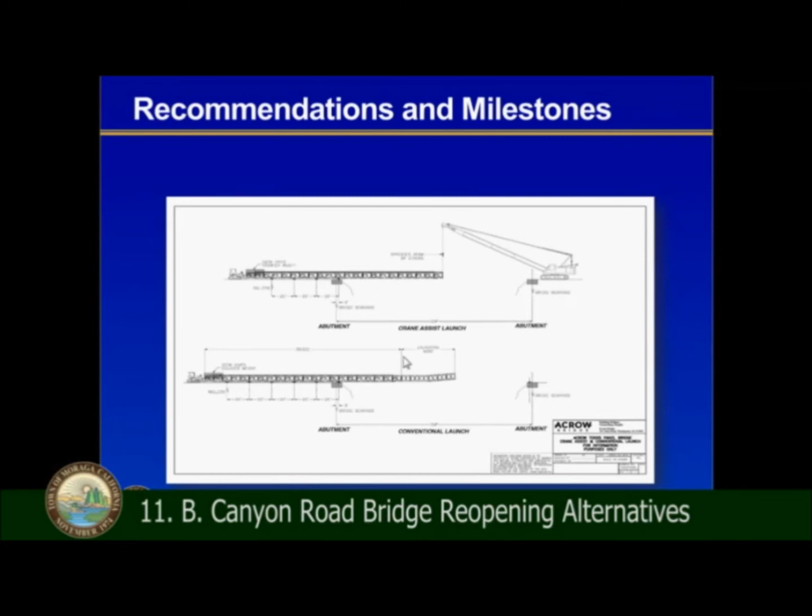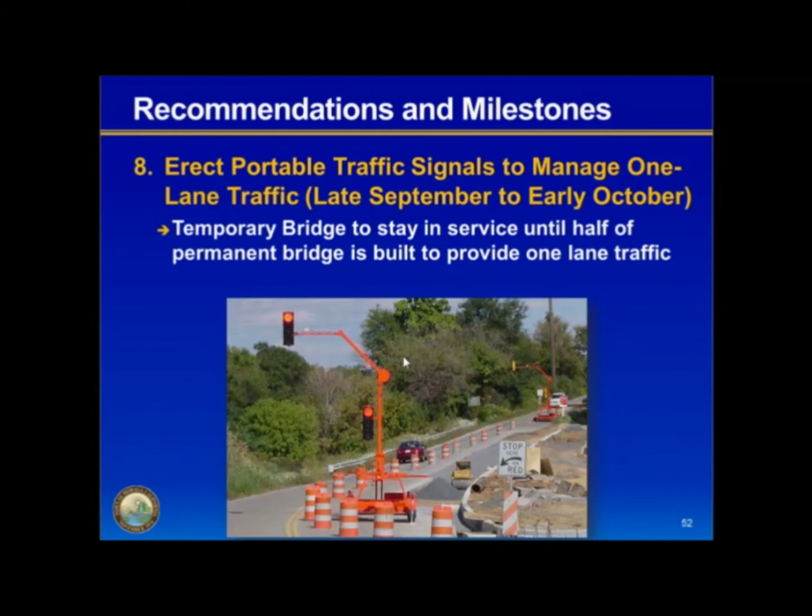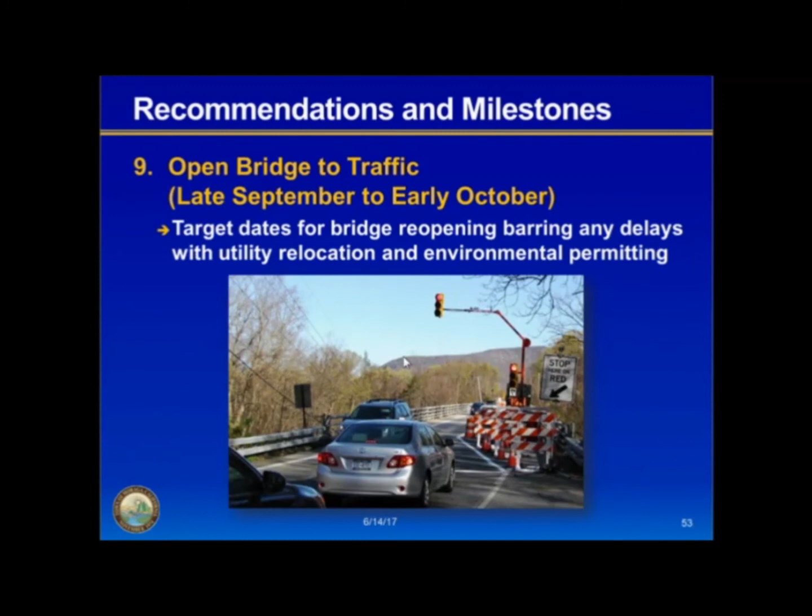The next action would be erecting a portable traffic signal system to control one-way traffic across the bridge, which would open up approximately late September to early October. The last step, after installing the temporary bridge, once the first half of the permanent bridge is constructed, we'd provide one-way traffic onto the permanent bridge, and the temporary bridge could be removed so the second half of the permanent bridge could be constructed.

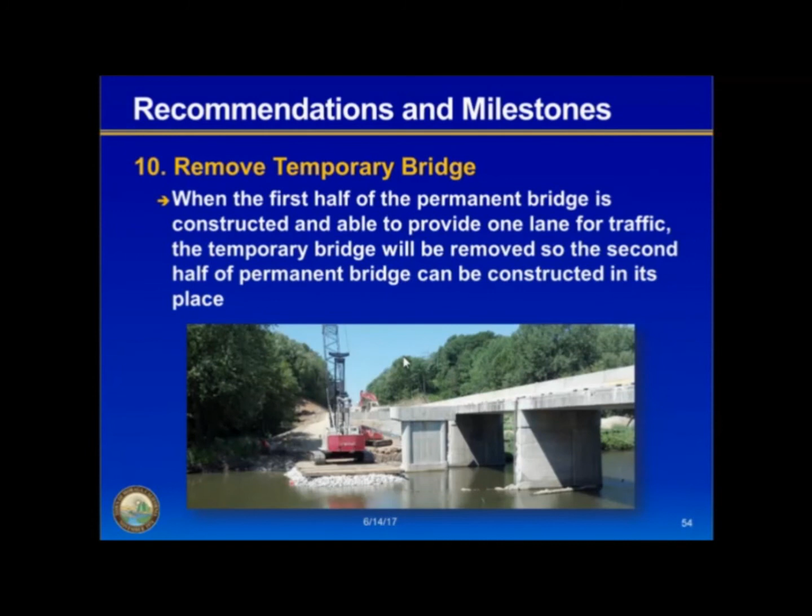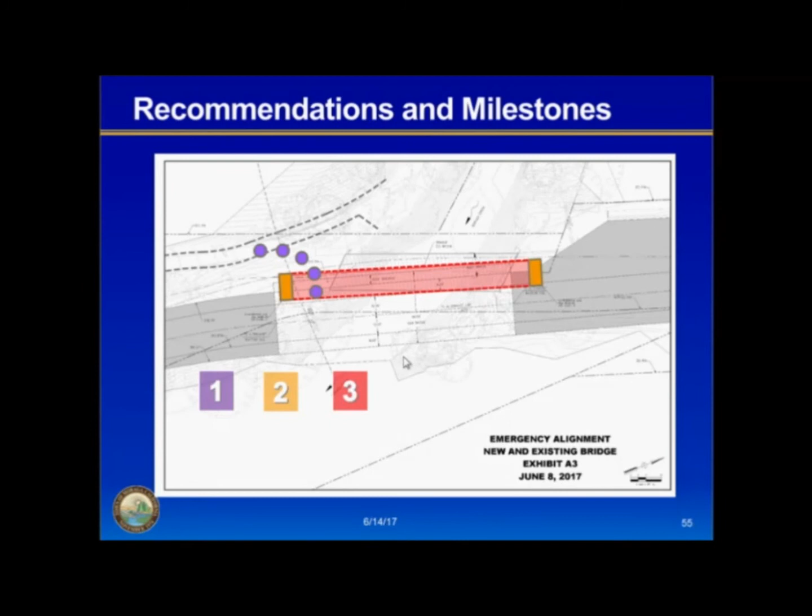I'll do a short illustration of how we've choreographed all the different components into place here. First, we'll install the protection at the southern side for the landing or abutments of the temporary bridge. This is being done in place because we have a landslide just to the west of the current bridge location. We would install deep piered abutments for the bridge to sit on, and install the temporary bridge on the west side of the roadway. We would install a temporary traffic control system to control one-way traffic through the area, and open it up.

In the next phase, we start construction of the permanent bridge, shown in green here, and we've moved it as far east as possible. We're constrained by the alignment of the creek, but we've designed it so that we could have the temporary bridge and the permanent bridge in construction or operation at the same time. Once the permanent bridge is constructed and we're able to get traffic onto it, we'll remove the temporary bridge and continue building the permanent bridge, opening it up at the end.

At this point, I'd like to hand back the presentation to Edric to talk about the finances of the project.

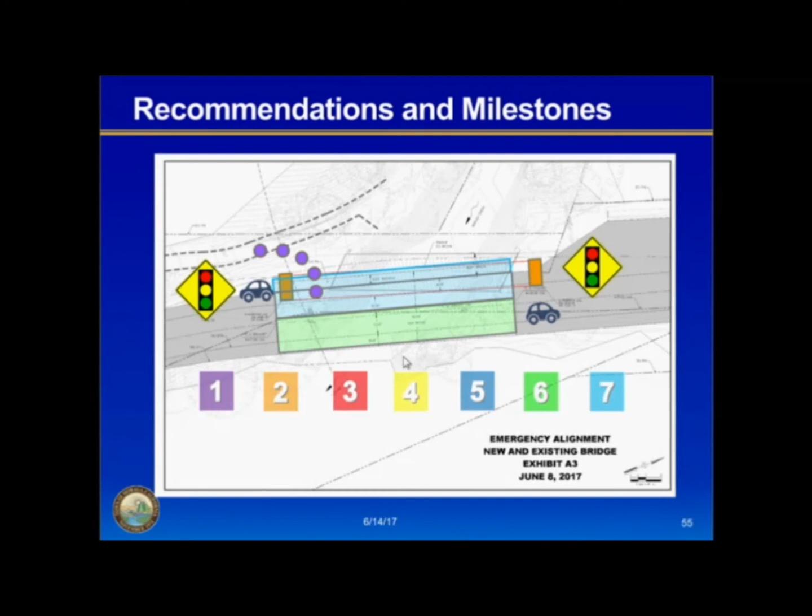So this is straight from your staff report. It describes what the expenditure plan is. It is a budget, and as you can tell, there are a lot of pieces, a lot of expenses. More importantly, the rental of the bridge is a mere $283,000. And despite what everyone says about fixing this for a mere few hundred thousand dollars, it's a lot more than that. So this is to clearly illustrate the complexity and all the costs associated with reopening the bridge.

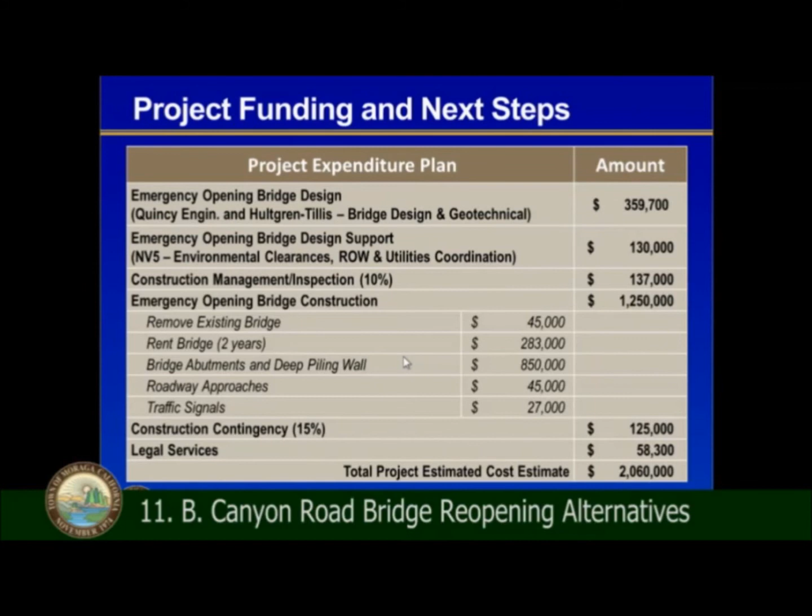Because we want to get this work started, we are requesting the council to appropriate some budget right now, and that would entail $500,000 from Palos, as well as $1.06 million from the general fund reserves. This is in addition to the $500,000 that town council had appropriated back on April 27th, for a total of $2.06 million.

So with this local fund, we're able to proceed with the construction of all the phases that were described. But in parallel, we are working with the federal agencies to secure emergency grants to the best of our abilities.

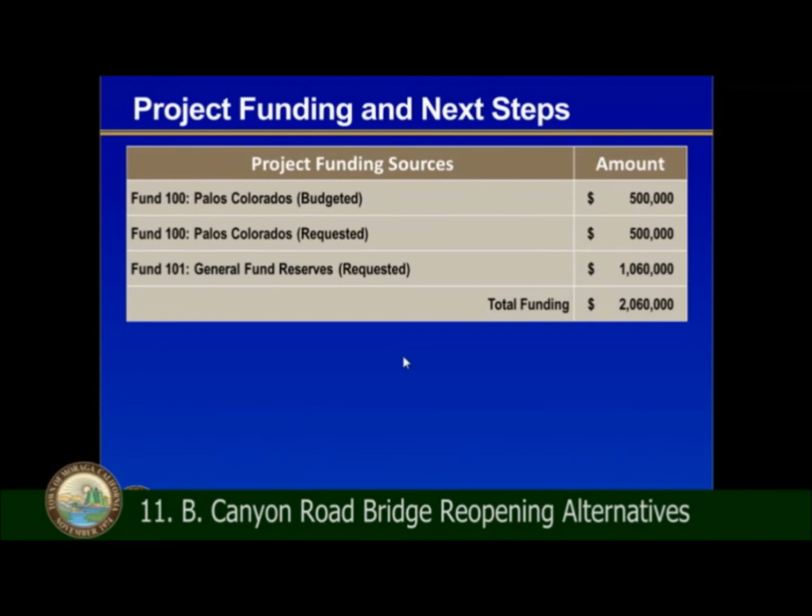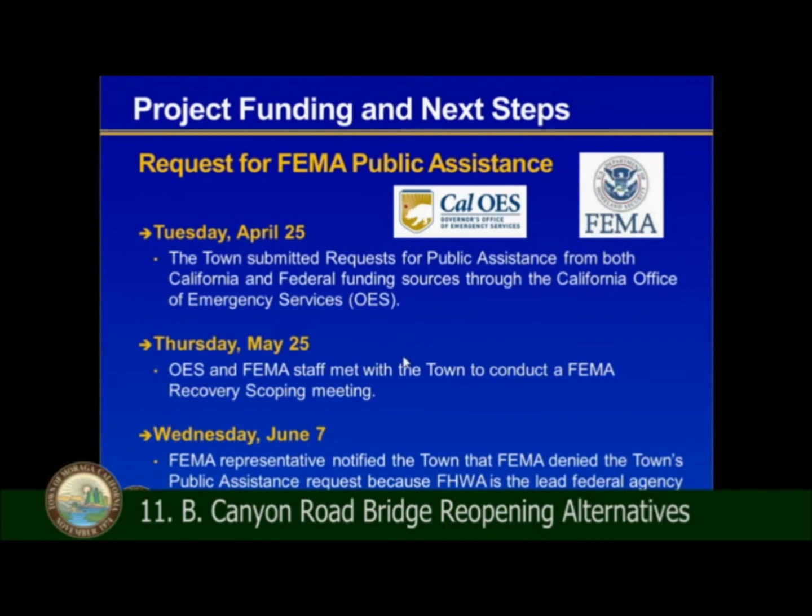I want to illustrate a timeline of what's been done so far in relation to the FEMA Public Assistance Program. On Tuesday, April 25th, the town submitted requests for public assistance from both California and federal funding sources through the California Office of Emergency Services. On Thursday, May 25th, OES and FEMA staff met with the town to conduct a FEMA recovery scoping meeting. This meeting outlined what eligible costs are considered reimbursable and started the 60-day window to submit all disaster damage records and associated costs for which the town is applying for reimbursement.

Eligible repair work is 75% reimbursable with a required 25% local match. In some cases, OES will also reimburse back a portion of the town's 25% match. On Wednesday, June 7th, FEMA representatives notified the town that FEMA denied the town's public assistance request because FHWA is the lead federal agency for bridges and roadway emergency projects. Staff subsequently submitted the damage description and dimensions form to allow the town to appeal the FEMA decision if needed in the future. Based on FEMA's feedback, the town will focus on working with FHWA for emergency relief program funds.

Regarding the FHWA emergency relief program, it has two sub-programs: emergency opening and permanent restoration. Emergency opening funding is for work that is to be diligently pursued and is needed for restoring essential travel, minimizing the extent of damage, or protecting the remaining facilities in a damaged transportation system.

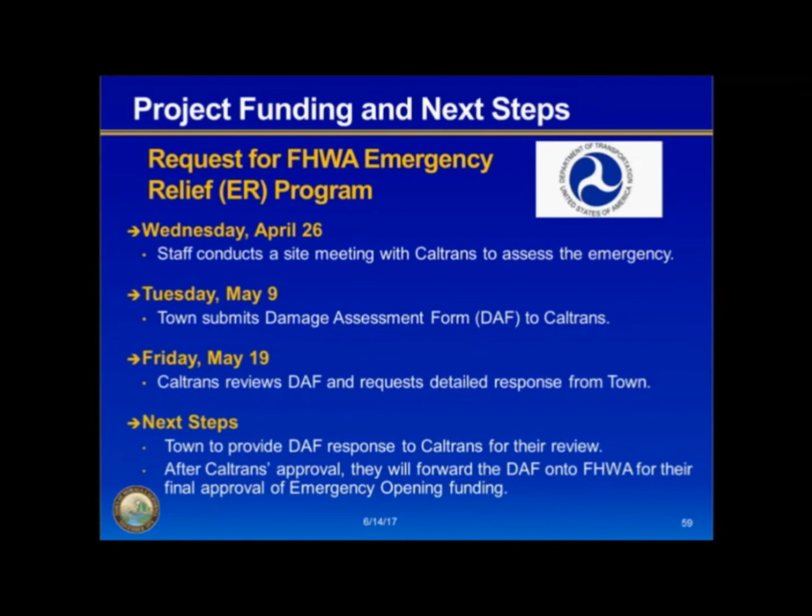The next step for the town is to provide a DAF response to Caltrans for their review. Afterwards, after Caltrans approval, they'll forward the DAF to FHWA for final approval of emergency opening funding.

So today, we're asking you to adopt a resolution. The resolution would include accepting the recommendation for the emergency opening bridge rental alternative with southern abutment protection.

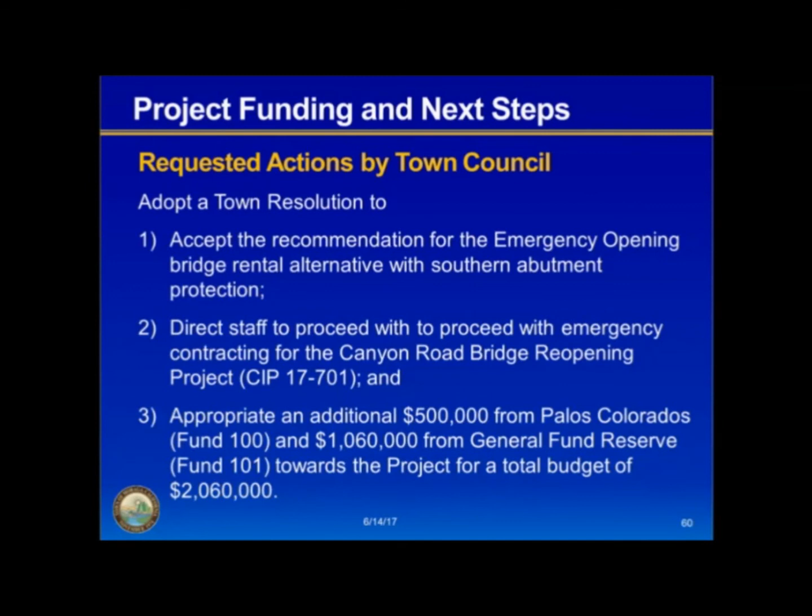It'll also direct staff to proceed with emergency contracting for the Canyon Road Bridge reopening project and appropriate the necessary funds: $500,000 from Palos, $1.06 million from general fund reserves, towards the project for a total of $2.06 million, inclusive of the $500,000 from April 27th, so we can get started right away with the schedule.

There's a lot of information, and with a lot of information we provide many different outlets for the public to access. We encourage folks to check out our webpage, to register with Nixle to get up-to-date press releases, as well as other emergency or town information that may affect them. Nextdoor is also a great community forum, and we post our various press releases through that venue.

We have our About Town news article that comes out approximately twice a month, and you can either go online or request to be put on a mailing list, and we're happy to provide you that newsletter, which includes this information as well as other great information about the town.

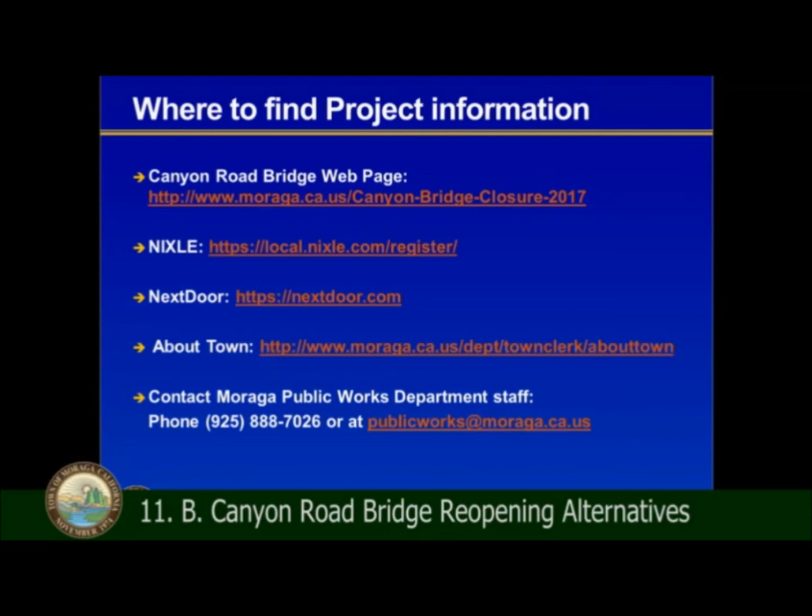And lastly, just contact us. We're happy to talk to anybody and answer any questions. Just contact our number at 925-888-7026 or email us.

We really want to thank the community members. We understand what a health and safety issue this is, the inconvenience, the challenges for emergency services, and the destruction that could occur if something happened in Indian Valley without access from our MOFD partners.

We really do appreciate the community for their patience. We are doing the best we can to provide the fastest response despite the complex outside processes we have to endure. And lastly, thank you to the town council for your direction on April 27th, telling us to do what we can to accomplish this task and bring back our recommendations.

With that, if you have any questions, we're here to answer. Thank you.